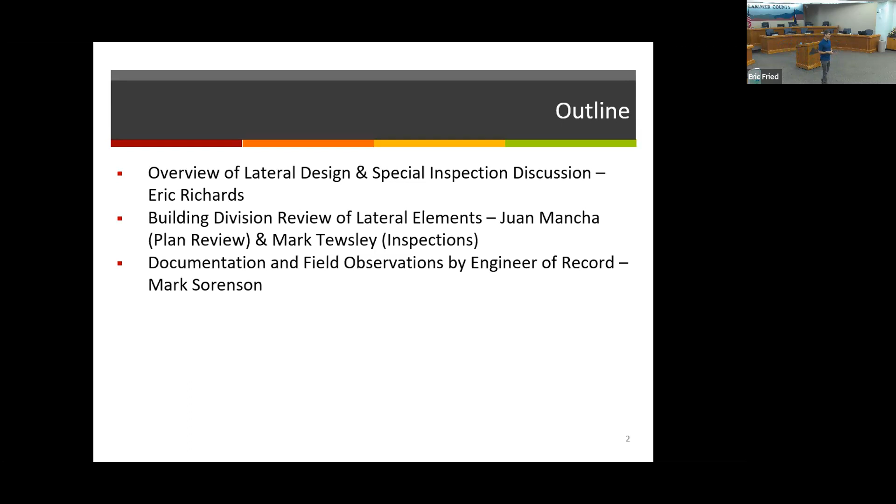Then again, Mr. Mancha and Mr. Tewsley will be talking about the building department's role in it, some of the plan review stuff that they go through, as well as field inspection stuff that the building department looks at. And then to end us up here today will be Mark talking about, again, the engineer's role in the field and some of the steps that we can take in the field during observations.

Some of our objectives, again, are to talk about and look at the complexities of lateral design, what goes into putting that design together, particularly related to our region here with the higher wind speeds and wind loads that we have. And also to discuss the importance of structural observations and structural inspections and the role that those play. And to provide an overview of the building department and the steps that they look at for some of their plan review, as well as their field inspections.

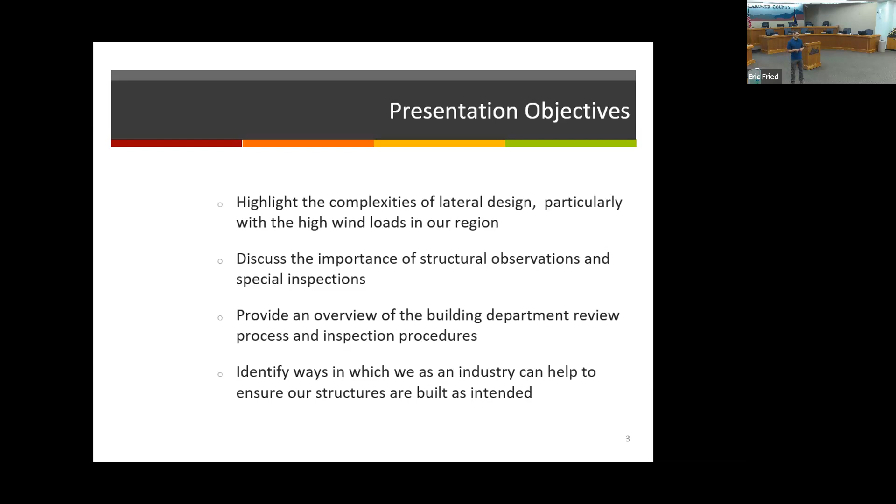And then identify ways that our industry can work to improve the whole process, working together and making sure that what we design is getting built, and built correctly.

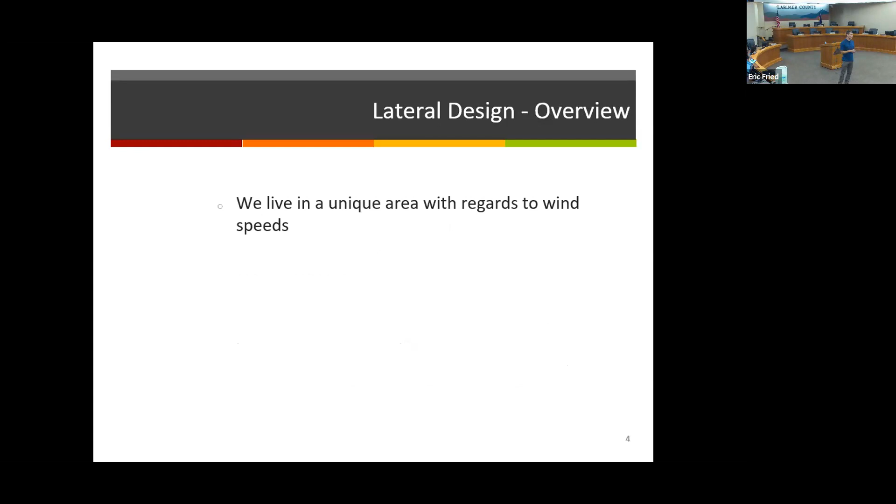So for a start in the lateral design overview, we live in a unique region here, not just because of the beauty of our mountains and people wanting to live here, but we also have our special wind region here with high wind speeds along the Front Range. Because of these wind speeds, we've got higher wind loads, making our lateral design more unique and challenging.

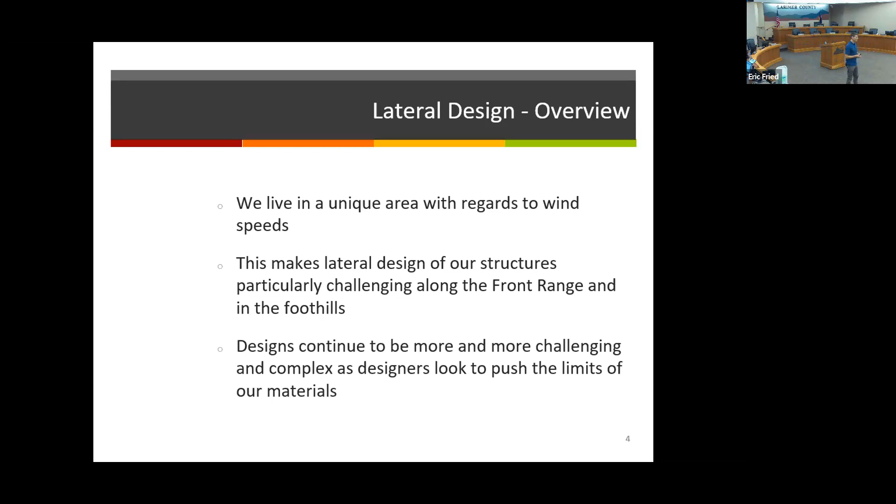And as I'm sure a lot of you know and see, our designs are becoming more and more elaborate, kind of pushing the envelope. Owners are wanting to see more glass, more windows, larger openings, garage doors in living spaces that 20 years ago we would have never thought about.

Here's an elevation view of this particular building. As you can see there, we've got large opening after large opening after large opening all the way across this wall elevation, therefore making a lateral design particularly challenging in this direction.

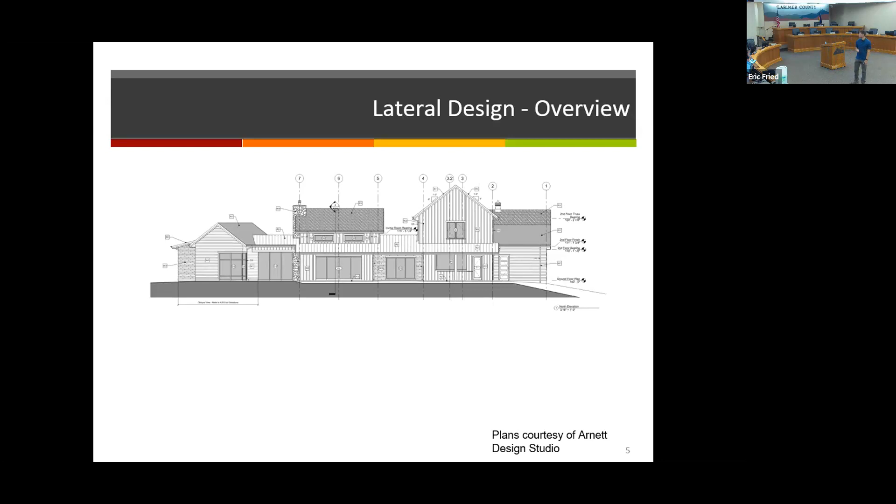And here's kind of that same floor plan. It's a little hard to see maybe from where you're at, but we've got large opening, large opening, large opening, storefront windows, another large opening. So lots of glass. From a lateral design perspective, that makes it kind of challenging to determine what's going to resist our loads in this building.

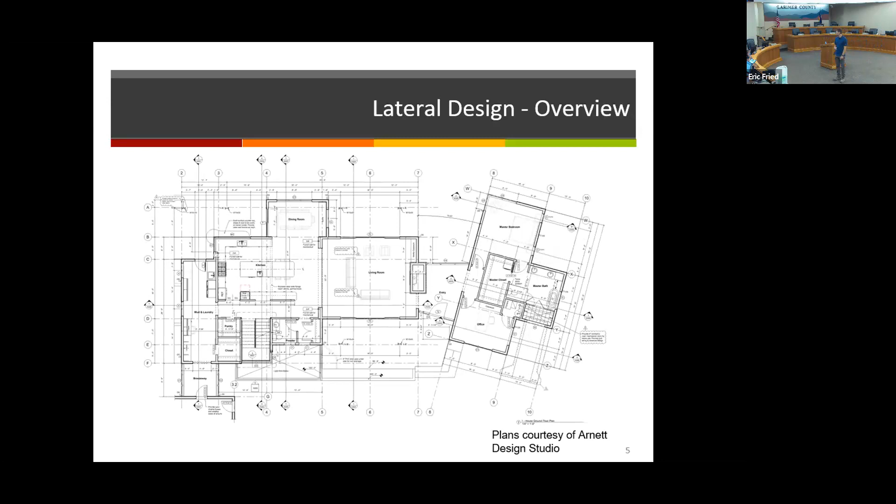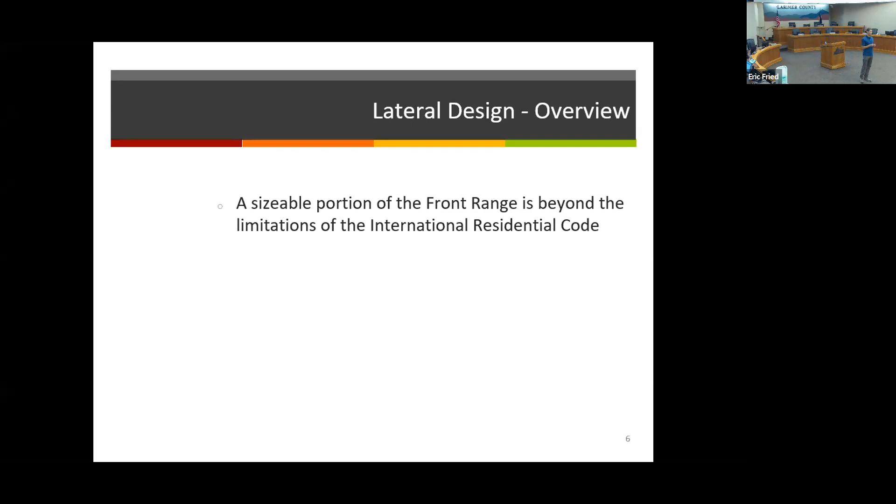So from a residential perspective, and in the commercial realm as well, a sizable portion of the Front Range falls outside of the scope of the IRC from a prescriptive wind design. Within the IRC, it says the prescriptive design is no longer valid for areas of 140 miles per hour and greater in wind speed. So once we reach those areas, we've got to look at other alternatives for our lateral design.

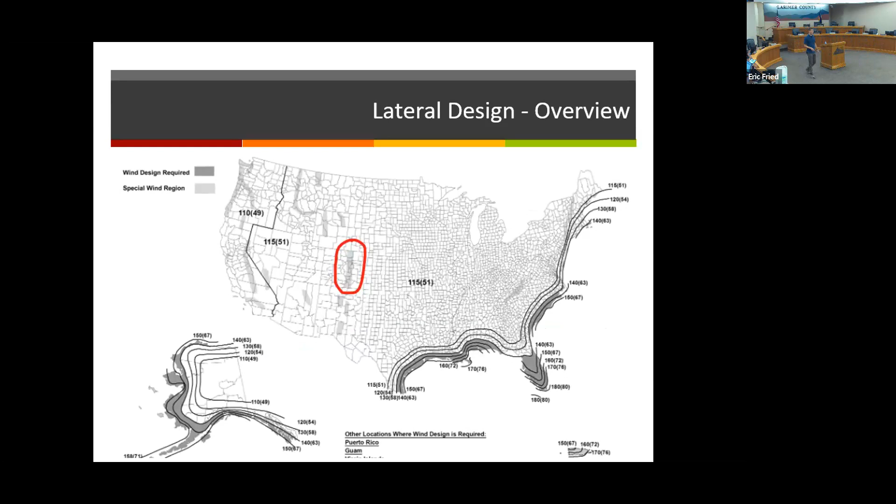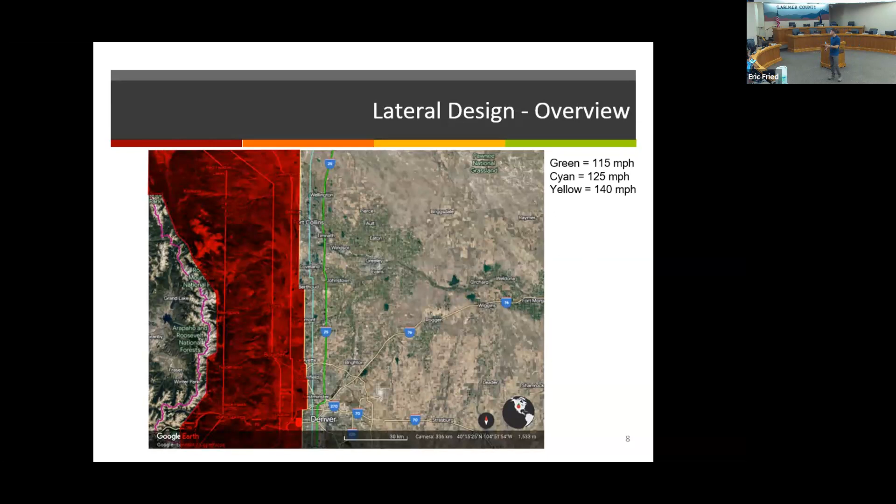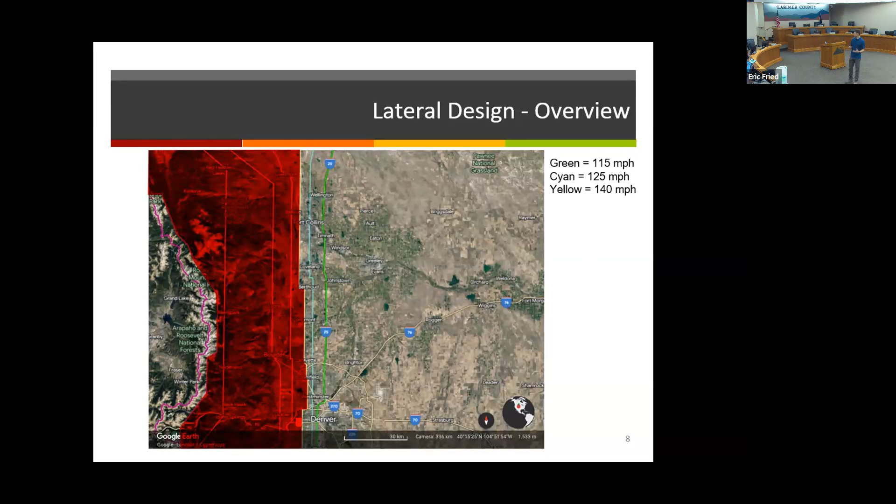The cyan line there moves up to our 125 mile per hour contour. And then the next yellow line, that's our 140 mile per hour contour. And that entire region shaded in red there is 140 miles per hour and greater, and therefore falls outside of the IRC and the prescriptive design methods for the lateral design within the code.

So within the IRC, at and above that 140 mile per hour wind speed, it does provide some alternatives. Some of those being the American Wood Council Wood Frame Construction Manual and the ICC Standard for Residential Construction in High Wind Regions.

Now, I haven't used either of these documents personally. Have any of you utilized any of those as an option in your designs? Okay, then I guess I don't feel so bad that I haven't utilized them either.

Typically, certainly in the commercial realm of construction, or generally anytime I'm designing a residence, I'm using ASCE 7 for loading, as well as the IBC, and the NDS, the wood design manual. Another alternative is the AISI standard for cold-formed steel framing. However, I have not seen any single family residences built out of metal studs in our area here. Just not commonly done from what I've witnessed.

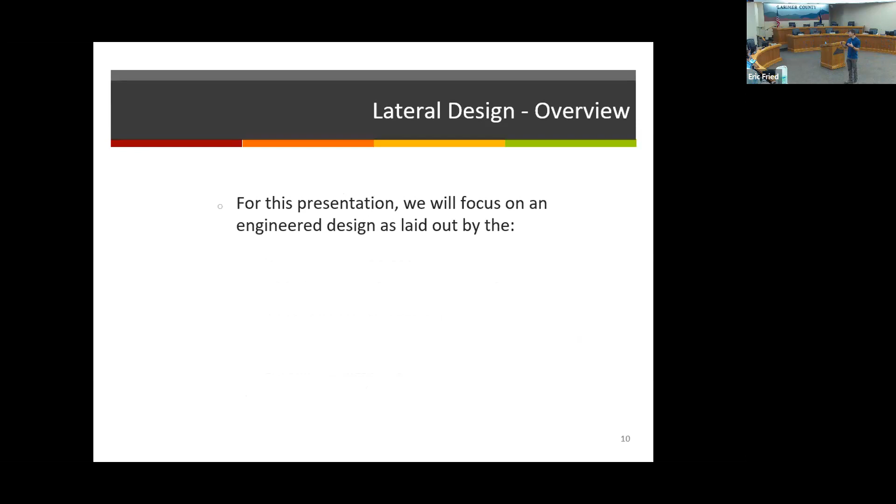So for this presentation, I'll just focus on an engineered design, since a large majority of our Front Range falls outside of the prescriptive design methods in the IRC, and this would be applicable to any commercial job you're doing as well. Again, utilizing the IBC and the American Wood Council, we call it the SDPWS, the Special Design Provisions for Wind and Seismic, the two codes to guide us through that.

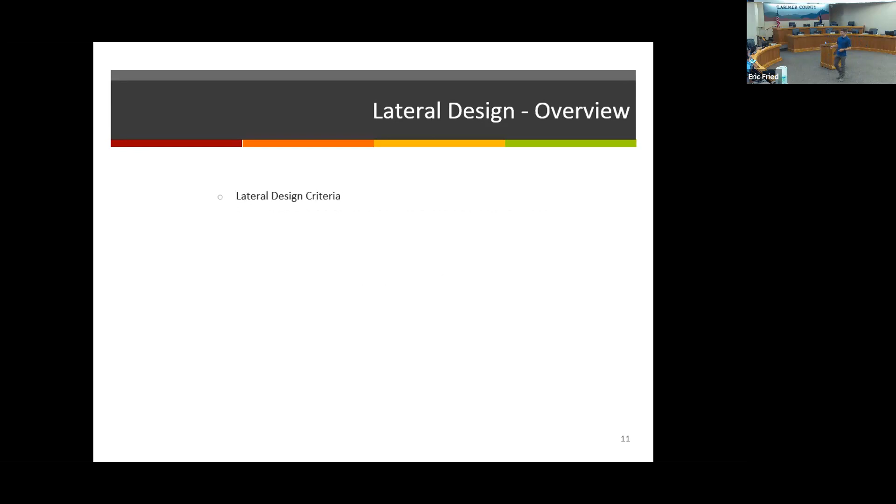So as engineers, as we're beginning our lateral design process, we need to determine our design criteria from a lateral standpoint. We're going to look at wind loading utilizing the ASCE 7 code. And again, SEAC has developed a Front Range gust map so that you can look at your particular job site and find what wind load to use for your project. Larimer County also has a really great tool, and I think Boulder County might have something similar. Larimer County has their wind and snow load map.

You can click on your parcel where you're designing. They've got your snow load and wind design speed for that property. And again, I think, does Boulder County have something similar?

I'm just curious, is everyone aware that through SEAC, there's the KMZ file that you can put on Google Earth, and then you can find your wind speed very easily just by looking it up with Google Earth? Is everyone familiar with that? Okay, that's a great tool. Yeah, if you're not, Greg, maybe we can try and work to send that out.

As Mark noted, that KMZ file is free to download. It's on the SEAC website. It's pretty easy to utilize. I've done it myself for that image that I had up there. Go to Google Earth. Got to play with it a little bit, but it allows you to import. You download that file to your computer. You can import it and then drop that in there and click on the wind contours.

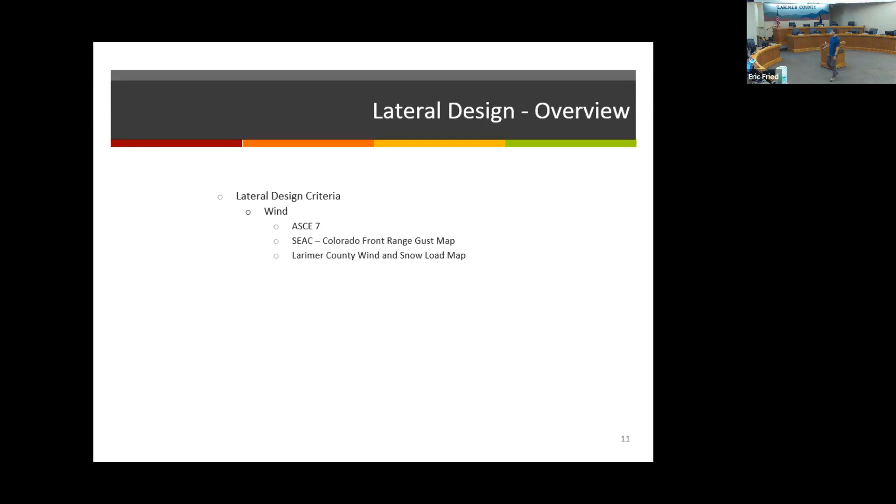So then continuing with the lateral perspective, if we're looking at seismic loads, not a huge concern here, and something that I'm not going to focus on a lot, but for this presentation, thinking more about our high wind load area. Seismic, again, ASCE 7 and two other tools that I've utilized. Structural Engineers Association of California has an online map that similarly, type in address or coordinates. It'll give you seismic design criteria.

I utilize that one. The Applied Technology Council, or ATC, has a hazards by location tool that you can use to type in your address. Similarly, it gives you your seismic design criteria. Other less common lateral loads that you might encounter could be flood loads, soil loads, or high in the mountains, maybe designing for snow or avalanche loads too. Again, less common, but specialized regions might have an engineer look at that.

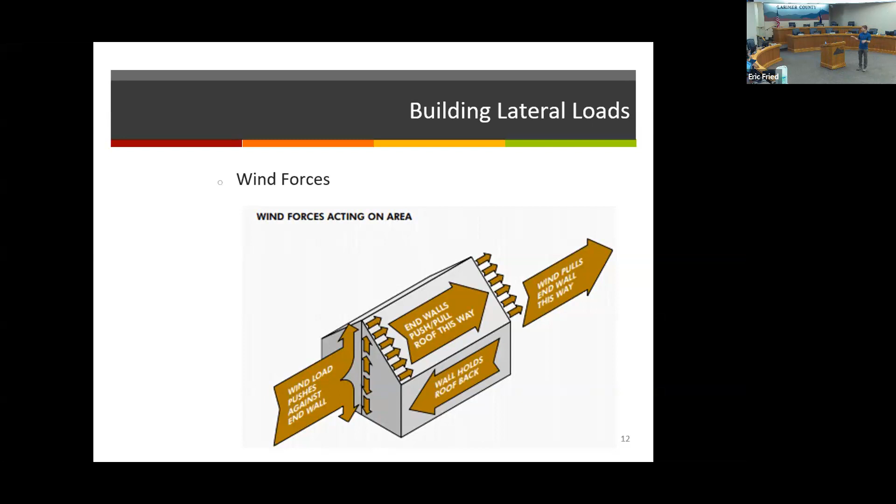So broadly speaking, in a building, wind loads are applied. As wind loads are applied, as you can see, hitting our walls, part of that force is going to go downward into the foundation. The other parts are transmitted up into floors and roofs, trying to push the building over, and then our lateral system is holding that back, whether that's with exterior walls or interior elements.

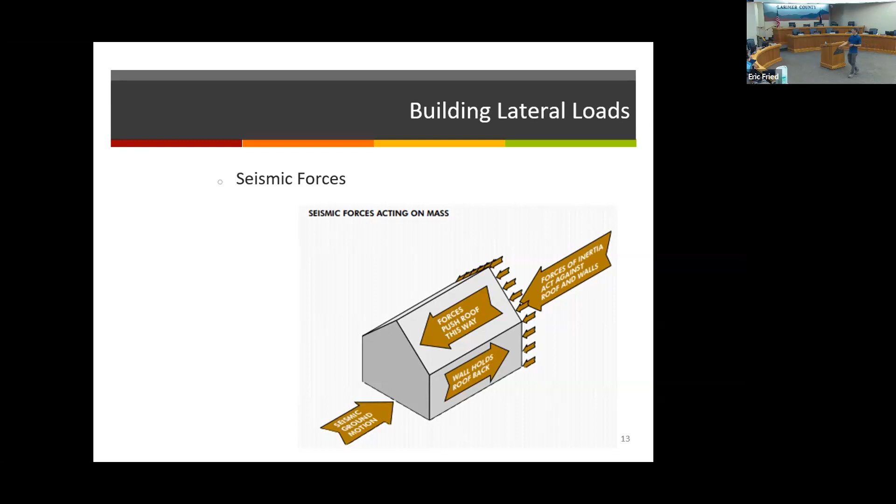Similarly, with seismic, ground motion is initiated, and then we have inertial forces wanting to push the building over at our roof and floor levels, and then our lateral elements, the walls and interior elements, are holding that back. Regardless of the type of loading, our end goal is to collect those forces or determine how they're applied to the building, collect those, distribute them to our lateral resisting elements, and then transmit that down into our foundations.

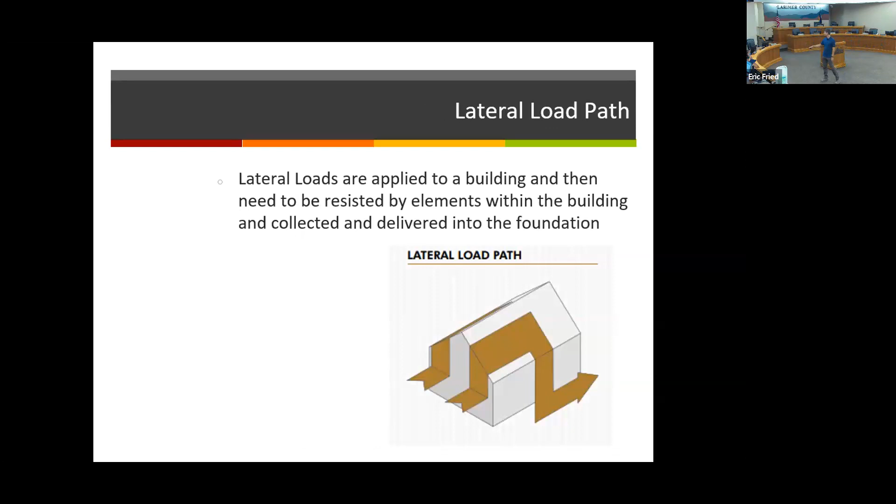Some elements that could be used for this are going to be steel braces, concrete or masonry shear walls, concrete or steel moment frames. I know talking with Mark Tusley here, the more elaborate designs we're getting, large openings and stuff, we're starting to see a lot more steel being put in residential construction as well as our commercial projects. Other options are cold-formed steel framed walls, again more on the commercial side, or wood frame shear walls could be used in what we're focusing on here today.

So as an engineer or a designer is looking at their building, trying to determine how to resist those forces, you're looking at the geometry, how loads are acting, where they're transmitted, and how we're going to resist those forces, generally distributing those to our walls and floors, and then looking specifically with wood construction, what walls are available, where can we resist those forces, and are they adequate, do they meet aspect ratios and such.

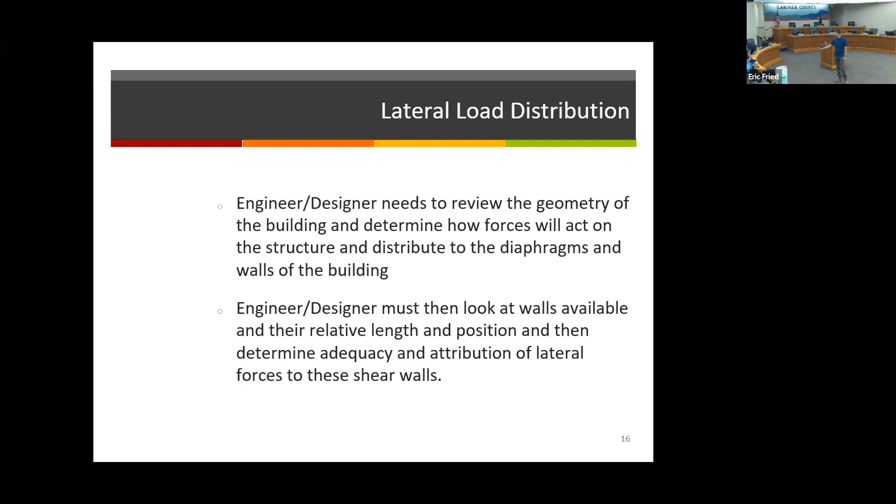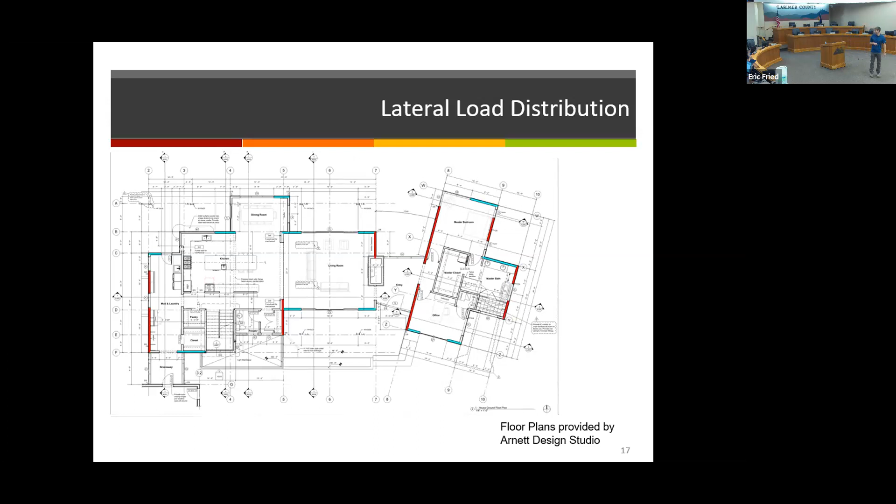And here's that 3D schematic again of that house. Again, we've got kind of large 2-story elements there, catching a lot of wind load. We've got clerestory roofs here. So, it's a lot of work to transmit and kind of cover where those forces are going within the building.

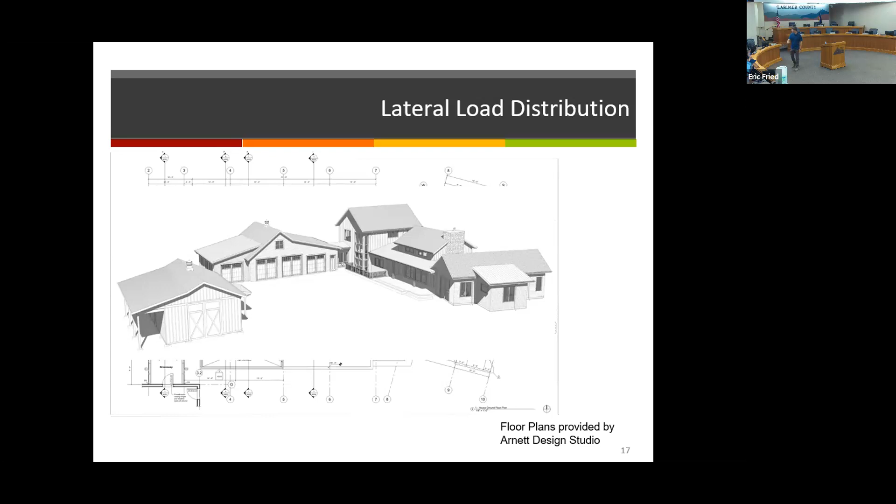So that kind of leads us then, once we've looked at a building, we're starting to determine what forces we have on it and how we're going to resist those. Then the designer is going to dive into the SDPWS, or the Special Design Provisions for Wind and Seismic. And the elements we're looking at, we call them our diaphragms. That's going to be our roof, our floors, and sometimes, or less common, ceilings could be utilized as a diaphragm as well.

And then we'll also be looking at designing our shear walls, or walls either from a gravity standpoint, or maybe they're functioning as lateral elements. Hopefully they're working as both. That's going to help us with overturning forces on those walls.

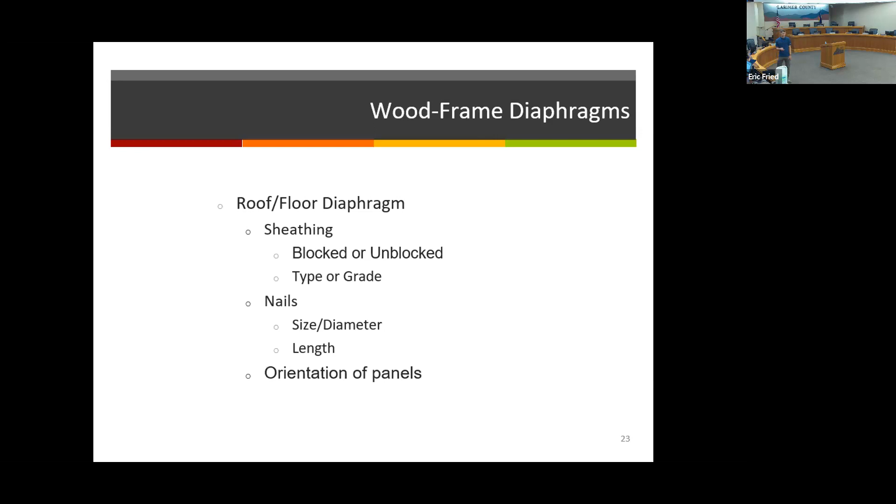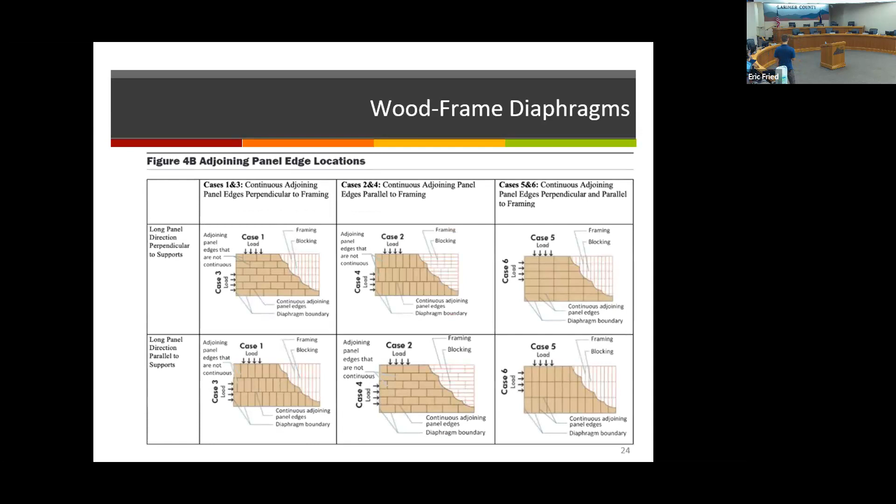Now the SDPWS has a graphic such as this showing different configurations of how floor diaphragms or roof diaphragms could be installed. As you can see, we've got load cases noted on there, 1 through 6, and then different lateral capacities associated with those. I would caution you to be aware, again, how those are oriented relates to different load capacities.

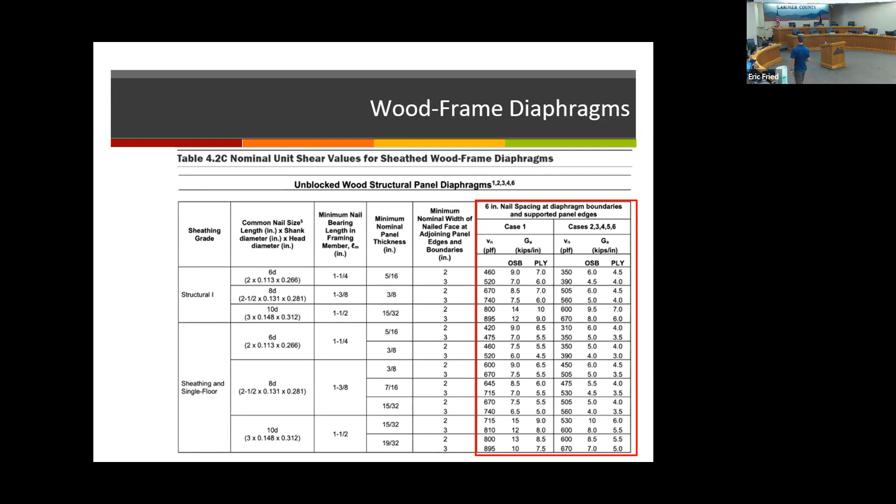And I would say, unless an engineer is going to be very explicit or very detailed in their design, I've always typically utilized the lower value or more conservative values there, but it's there as an option. So for inspectors and building officials, just be aware that that could be something that a designer has selected and needs to use.

So orientation of our panels, and boy, there we go. Sorry about that.

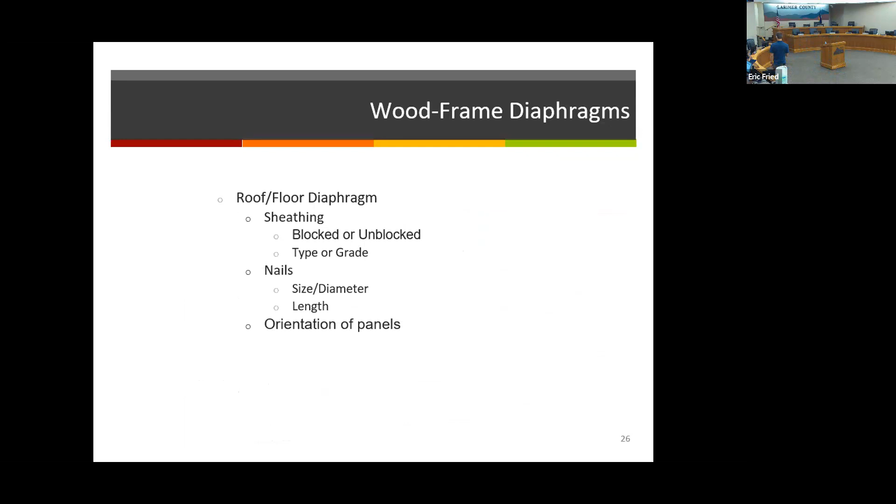Perhaps those values don't work. We've got some other tools at our disposal, some high load diaphragm selection tables. And one thing to be conscious of when designing these is that special inspections are required per the code for high load diaphragms. And with that, we've got different nail pattern options that we could select to get to those higher values.

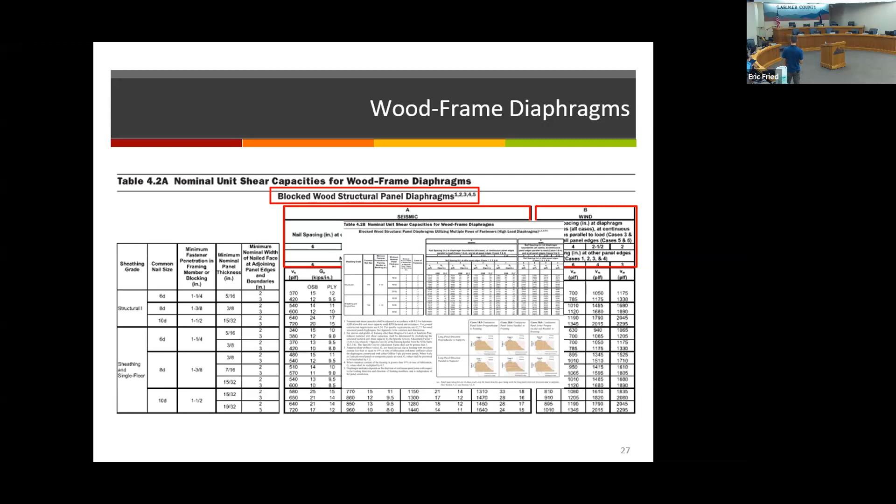With that comes along some specialized details that are required per the SDPWS code. These are shown in there. So again, for building officials, inspectors, designers need to be aware that if that high load diaphragm is utilized, these are special details that need to be paid attention to.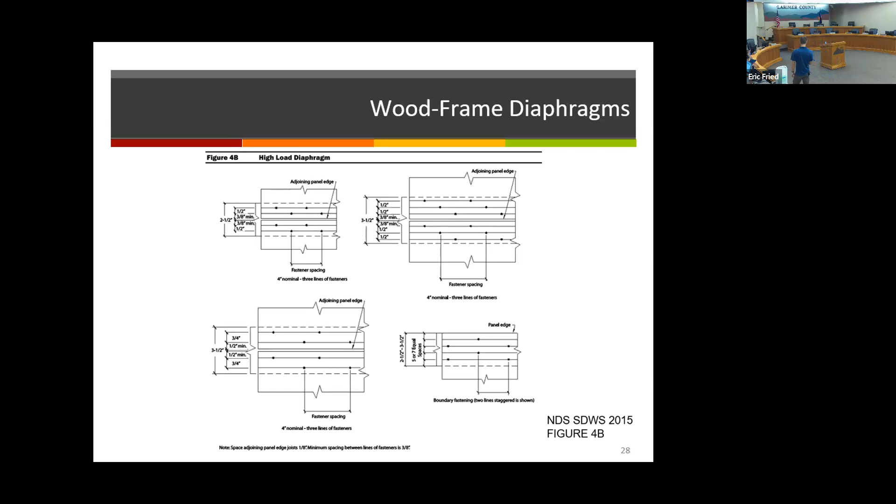Some other elements of the roof floor diaphragm that we'll be looking at would be framing size and spacing. If you've got areas where you're exceeding kind of 24, 32 inches on center, that starts to impact, again, those design values. And then we've got to look at the connection now, how we're transmitting those forces out of that diaphragm into our lateral elements or shear walls.

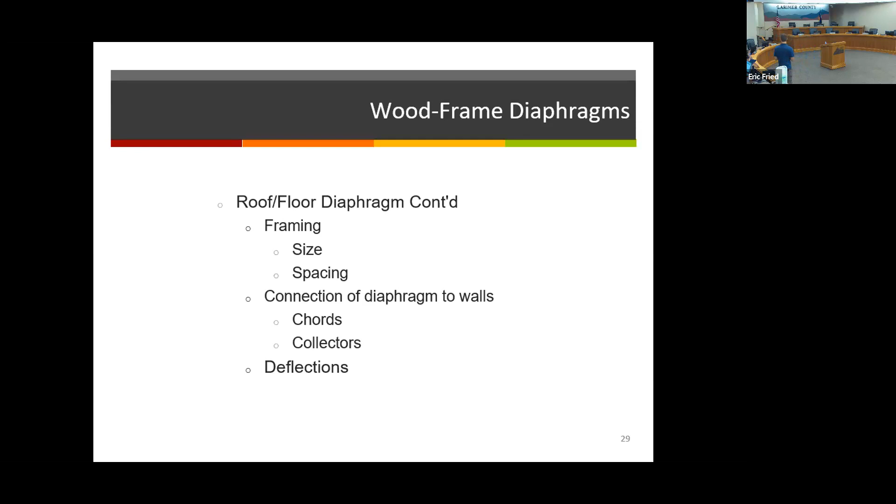And the other pieces of a diaphragm are going to be the chords, which are resisting bending forces in the diaphragm, and then the collectors that I'd highlighted before. All elements that need to be thought through, addressed, and designed. And lastly, looking at deflections within that diaphragm, making sure they're staying within the code prescribed limits for those elements.

Now, through the horizontal members, now we're looking at our vertical shear wall elements. And with that, we've got several shear wall types at our disposal. Those are going to be segmented, perforated, or force transfer around openings. And I would say the general selection process is going to be in that order. A designer is probably going to start with a segmented option. If that's not working based on the amount of force or length provided, maybe we're going to go to a perforated shear wall. And lastly, a force transfer around openings methodology.

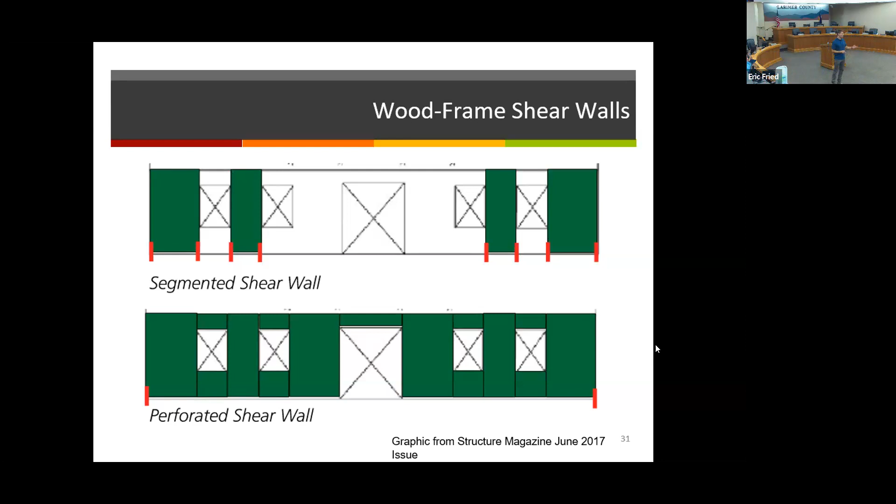Yeah, there are tools out there. I have seen APA kind of advertise that. I've never dove into that and tried it myself, but it's pretty handy. Okay, maybe check it out sometime.

So thinking about our different methodologies with our shear walls, similar to the diaphragms, we need to be thinking about our sheathing type here. We've got more options within shear walls, because now we have not only the wood structural panels, but we've got gypsum or Portland cement plaster, lumber sheathed shear walls. Again, what I've seen mostly in our area is the wood structural panels for the outside; sometimes we can get into gypsum shear walls on the interior of a building. And then again, similarly, selecting our thickness of our sheathing.

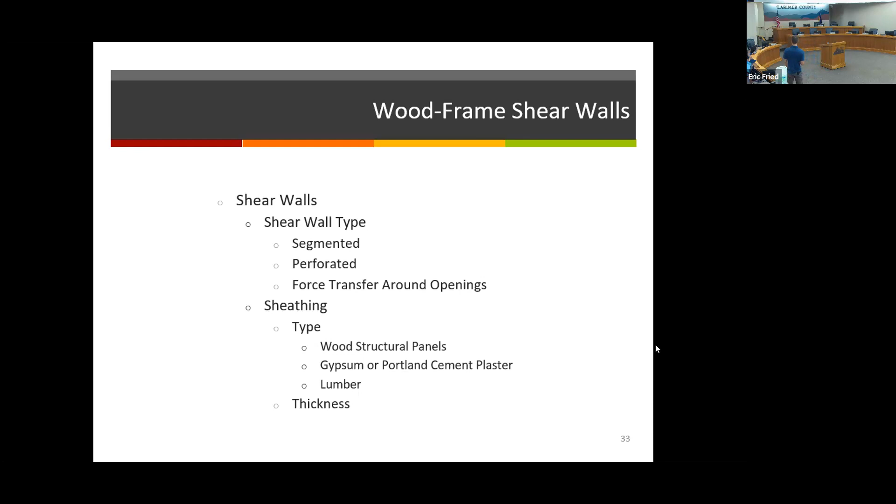All right, and then similarly, our nail again, 6, 8, 10d. I think, Mark, you were talking about, or the other Mark here, the new advent of the ZIP sheathing or the R-sheathing out there. We've got insulation that contractors are trying to drive nails through. So something to be considerate of is our nail size and spacing, and being very explicit with what we need and what system is used there.

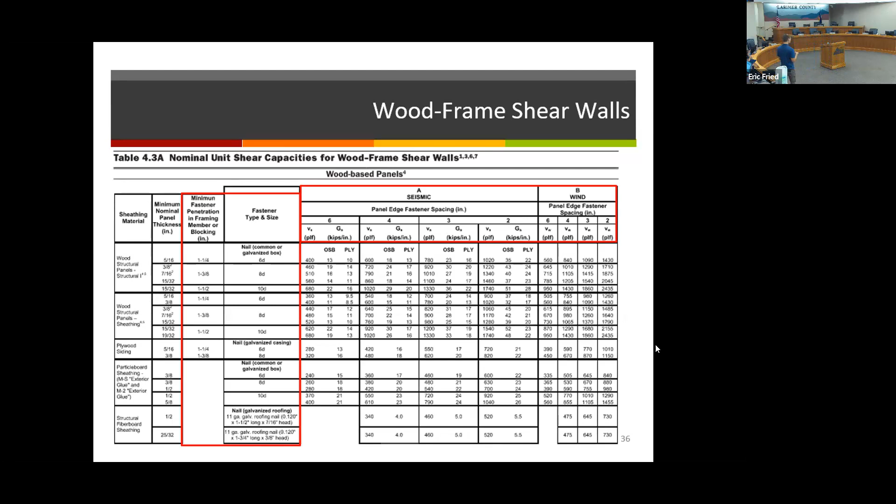And then again, here we've got different options for nail spacing, translating into different shear capacities or values for our shear walls. It used to be when designing, you could have within the same table blocked or unblocked values. The SDPWS has now gone away from that. Blocked shear walls are the standard. And if you want to use an unblocked value, which has lower capacities, you can do that, but you just have to take a reduction for that.

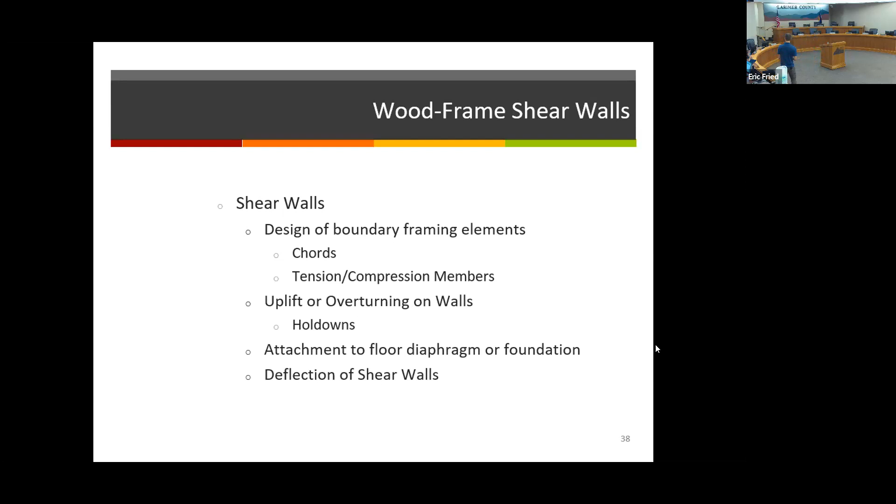Kind of the same thing for the shear walls here. We've got our chords, top and bottom plates, our tension and compression members, side elements that resist those forces. Looking at lateral overturning of shear wall panels, especially in the segmented design, where we have to design our hold-downs for those. And again, our attachment at the top of the wall from the roof or floor diaphragm, and then down at the base into our foundations or floor below. And then lastly, we need to be considering deflections. So there's a lot of steps and things to look at in the design of that.

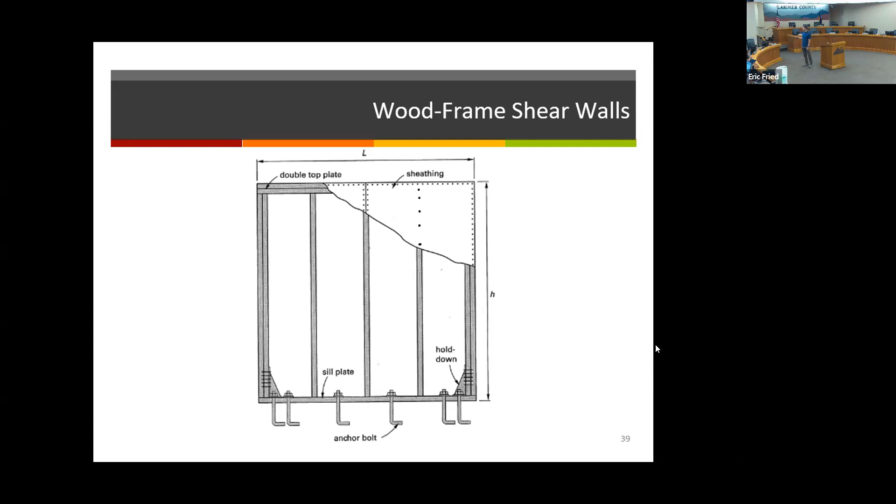Here's a graphic of a standard shear wall construction. Again, we've got our top and bottom plates there. We've got side members for tension and compression, our sheathing on the outside face. We've got hold-downs on the ends there, and then anchor bolts in the sill. So there's just a lot of parts and pieces of that.

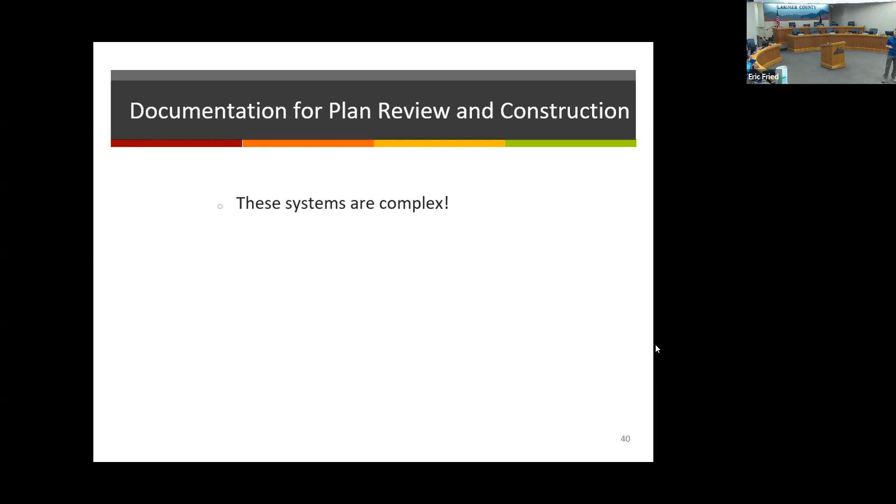So that goes through a real quick, broad overview of the steps for a lateral design, thinking about a building system and getting all those forces transmitted from the roof through the walls, maybe multiple floors down to the foundation. These systems are complex. There's a lot to them. So for us as designers, I think it's important that we remember that those folks who are out there trying to construct these and inspect them are generally not structural engineers. So we need to work really hard to be explicit in our details and the design, and clear and concise with that.

Ways that we can help ensure that we're doing the best job that we can are through clear and concise documentation. I know Mark's got some details he'll show in his portion of the presentation later to work on that. But another tool that we have to help ensure that things are getting built as designed are our inspection and observation processes.

Now, structural observations, as defined by the IBC, is when a registered design professional is out there looking at our structural systems for general conformance. And then likewise, special inspections are code mandated to look at particular elements and aspects of the building, whether it's continuous or periodic, looking at very specific elements by trained individuals. For example, the wood diaphragms and shear walls that I've discussed here.

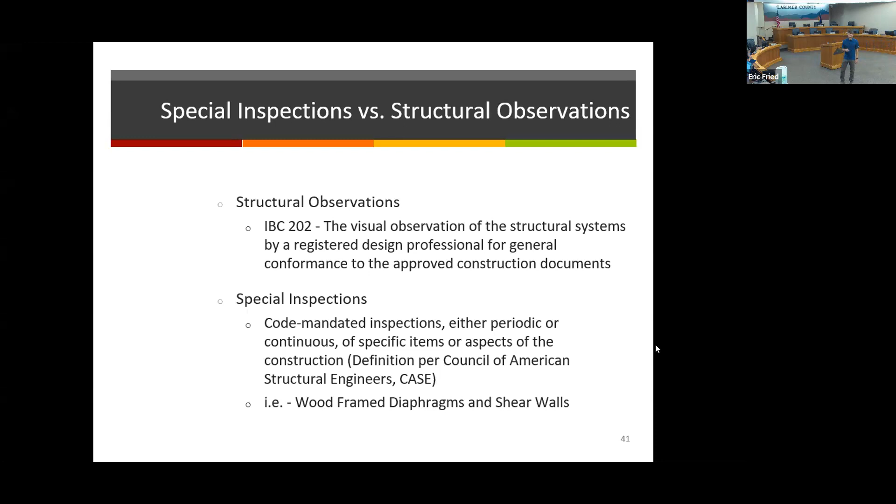So, in my opinion, structural observations and special inspections are not one and the same. They're not equal. Structural observations, generally, if I'm out there performing, is a bit more higher level. I'm not looking to quite the detail that I would expect a special inspector to be doing. I can look at sheathing thickness. Are the shear walls installed at the locations I have? Are those hold downs there? There could be a lot more depth, but generally an observation is higher level and not the nitty gritty that a special inspector would be looking at.

First off, your liability insurance for most of the engineers here will never cover the word inspection. You're correct. I do a lot of testifying in a court of law. There's one engineer in particular that was working in Denver. He got on the witness stand and literally got ripped by the attorney. And he's out of practice. He quit. Observation is what you do, okay? Special inspection is an open book for every attorney in this state and country to rip you apart, because you don't do a special inspection.

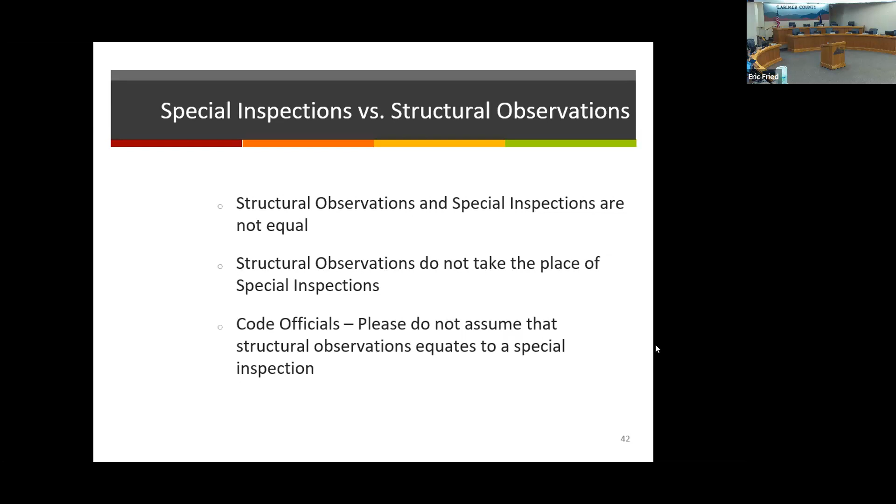That's 100% true. As structural engineers, we do structural observations. Correct. It does not replace a special inspection. It is in addition to a special inspection, if special inspection is required. But many of your code officials or building plan officials right now require that you specify the special inspections on your plans. So our drawings indicate what special inspections are required, not that we're doing them as the engineer of record. That's still bad news. Another building official required that too; I told him I don't do special inspections, and he wasn't going to issue a permit.

And as I did in Jefferson County, the foundation compliance form letter, if you read the last sentence, I got that put on the form. Before that, it was a warranty and a guarantee of the performance of that foundation. Now it has a disclaimer sentence at the bottom. The same goes with having to have special inspections. There's a state provision in professional engineer licensing that you can't tell me how to run my job. So be careful of the word. I do not use the word special inspection or inspection. When I go on site, we do an observation report. Correct. We do not write an inspection letter ever. Engineers, all of us in the room, we don't do inspections. We do structural observations.

And I used to design hotels and motels around the whole country. You've never gone through an inspection until you've been to California. Yeah, that's true. They have a tape with holes in it spaced at 6 inches on center. They will literally pull the tape down along the sheathing and nailing. Where you're missing a nail, where the head of the nail is not in that circle, they put a little red dot. And if you exceed 40% or 30%, depending on the jurisdiction, they make you re-nail the whole entire thing. We'll get to that later, because I'm going to talk about structural observations.

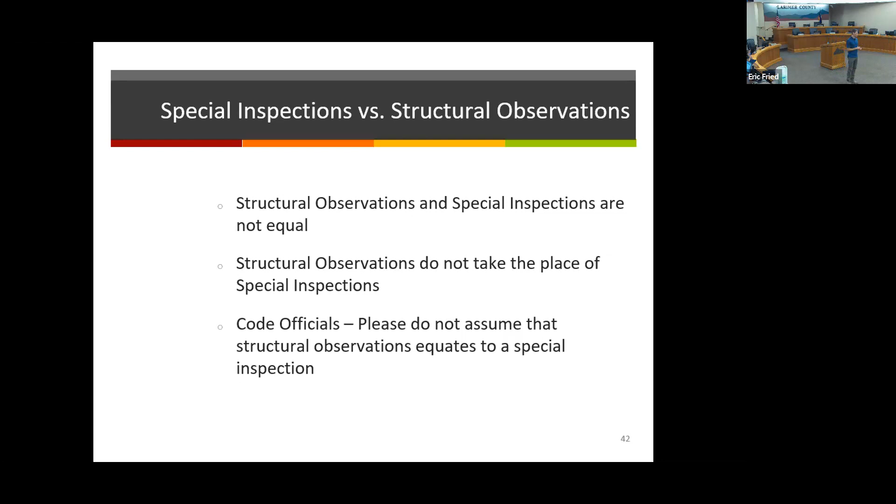And again, to my last comment up here, don't assume, because structural observations are, in our world, in our mind, different from inspections. They are not one and the same. Now, are we as registered design professionals allowed to operate as special inspector? The code does permit this, provided we are qualified, quote unquote. What constitutes qualified? I don't know, to your point there, that's a good question. Are there certifications, education and stuff?

I would say if I had to, I could operate as a special inspector for foundation elements. I could look at rebar. I could look at the size and spacing and clearances. I'm not qualified to look at welds, high strength bolting. I don't have that certification background or anything. I could not operate at that.

Here in our wood framed that we're talking about, could I be an inspector? I probably have those qualifications. I could look at nail sizes. I could look at penetrations. We could look at sheathing sizes, but there's a lot of parts and pieces there that if I were to operate as an inspector, I'd have to have a lot of checklists and processes in place.

And to Juan and Eric's point, and maybe other jurisdictions, the thought and intent was to make sure that our code officials aren't expecting us as engineers to be performing observations and inspections, because in our minds, we're always doing observations, and those are not equal. So are there liability issues or restrictions on insurance policies to do that?

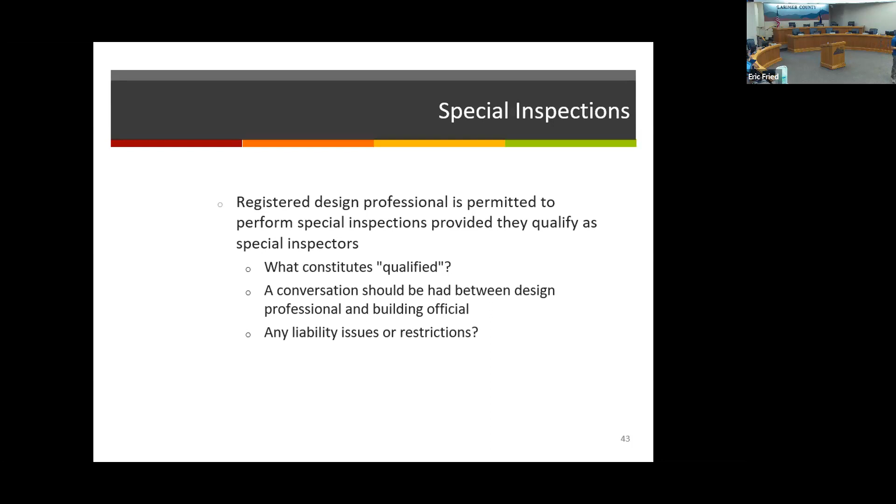But he did caution that if you are going to act in that way, you work really hard to put the proper processes in place, that you've got checklists and procedures written up so that you and your staff are looking at every single thing. So I'm not advocating that we try to operate as a special inspector, but it's permissible by the code, and there may be certain instances where you are the most qualified individual to do that. So if you're going to operate in that manner, I just caution you to make sure you've got the right processes in place.

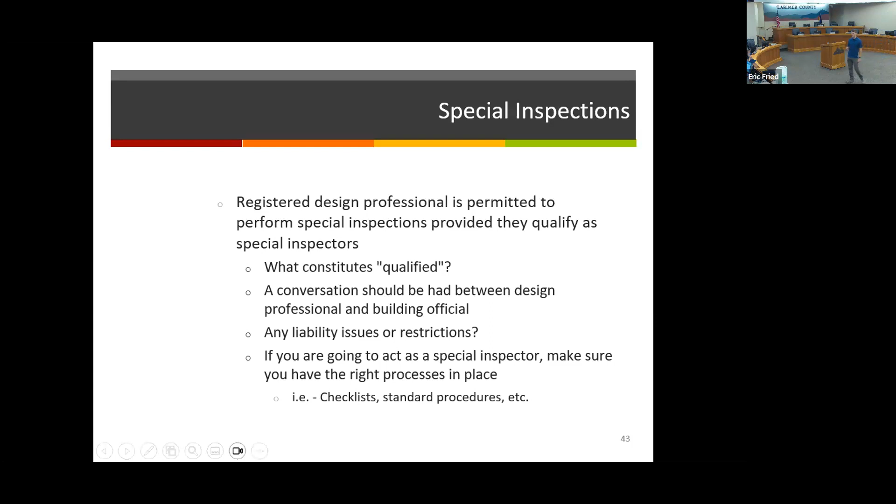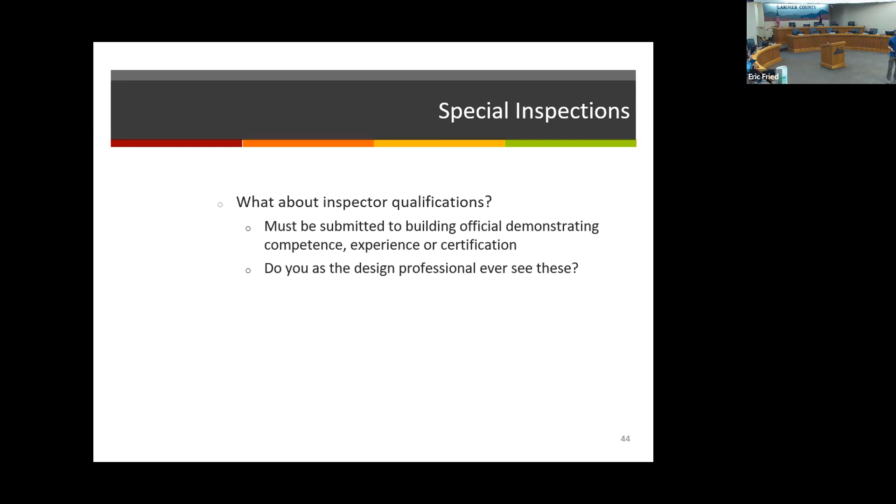Inspector qualifications. Now, the code requires, whether we're looking at third parties, that these qualifications be submitted to our building officials so that they can review those and verify that they meet a minimum level of standard. Do you as the design professional ever see these? I personally have not. I've not specified those and not reviewed those. And just to pose a rhetorical question to the group, is that something that we should consider or get into? I don't know that I want to dive into that, but is that something that we need to think about as a group and look at, maybe something for us to consider.

So when are special inspections required? Again, speaking of our wind region here, per IBC 1705.11, in wind exposure category B with wind speed at 150 miles per hour or greater, special inspections are required. City of Boulder falls within that, correct? Yeah. Likewise, exposure category C and wind ultimate at 140 miles per hour or greater. Again, a special inspection is required for those structures.

Now, IBC does have some exemptions. Light frame wood structures designed per the IBC. A lot of these are extraneous structures, small additions that don't cause life safety concerns, or when permitted per the IRC, which I found interesting because the IRC prescriptive method doesn't work above 140 miles per hour. So you have to use those other two documents if you were going to design for that.

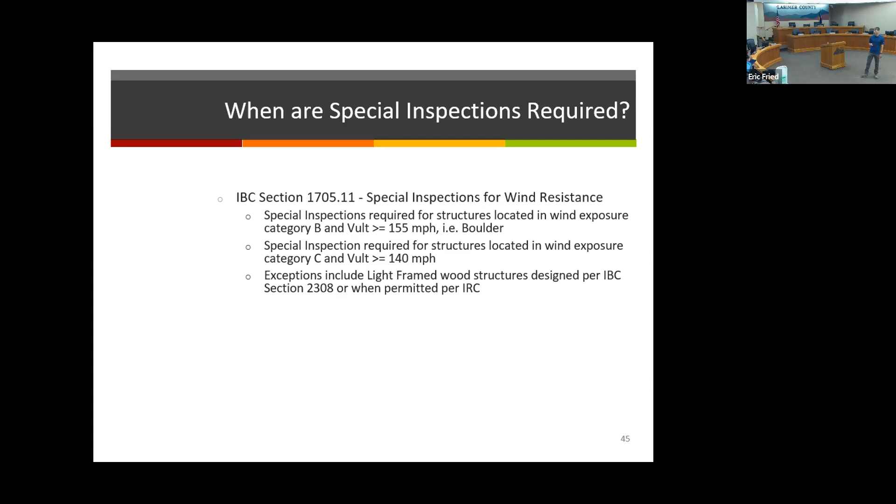Okay. And then section 1705.11.1 for structural wood, periodic and special inspection is required for our lateral force resisting elements: shear walls, diaphragms, hold downs, drag struts, things of that nature. Now the code does provide an exception: if we're outside of the 140 miles per hour, and you can have shear wall and diaphragm nail spacing at 6 inches on center at edges and 12 inches in the field, special inspection would not be required.

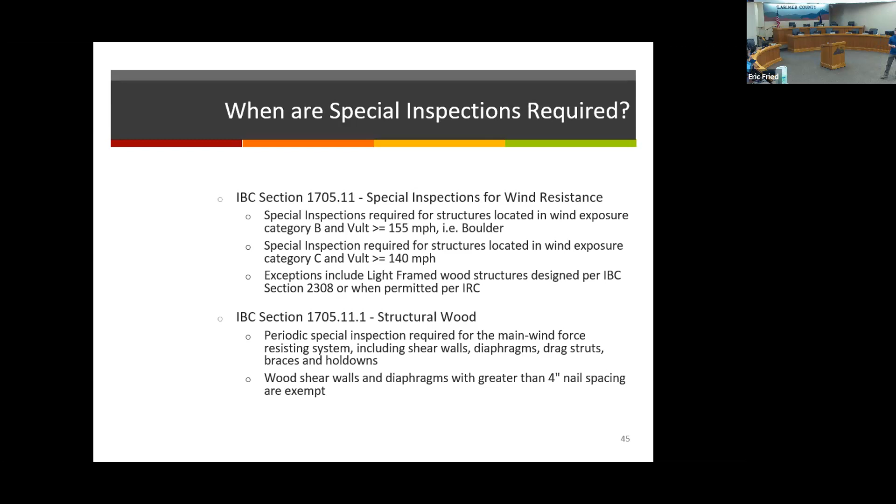Next. All right. So that got me thinking, as I drive east of Fort Collins, anywhere east of I-25, the Greeley area, Windsor, East Fort Collins, we've got tremendous amounts of multifamily residential construction going up. We've got 2, 3, 4-story buildings being constructed. And if you can design those from a lateral standpoint so your shear walls are at 6 and 12 for nail spacing, and we're outside of that 140 miles per hour, special inspection would not be required.

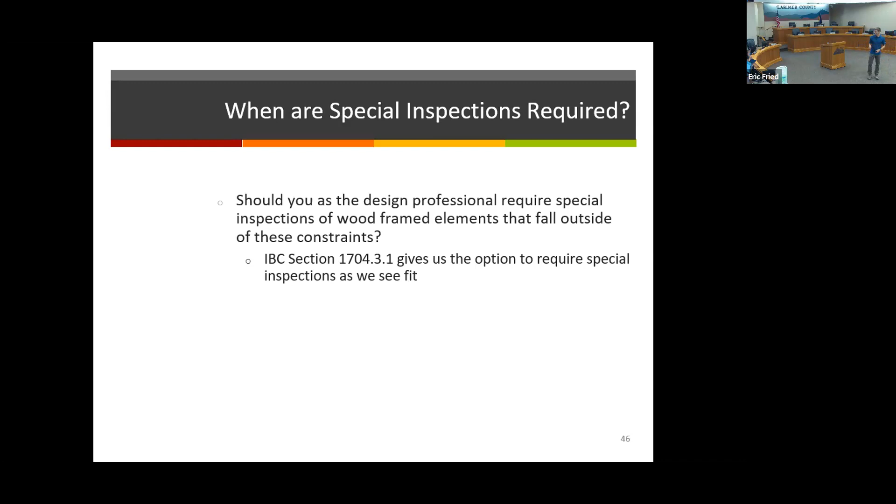Now, are we okay with that, or would we want those to have some higher level of inspection? The code does permit us as design professionals to require it as we see fit. Another driving factor for providing a presentation of this nature is that a lot of those multifamily projects have corridor walls and demising walls that are a good use of an interior gypsum shear wall. Now, the challenge with that, as well as potentially a double-sided shear wall, is the sequencing.

Walls go up, floors go up, roof, everything's covered. We get the exterior sheathing on, inspector comes out, looks at all that, everything's good. Contractor's moving forward. Well, I can't install those interior gypsum shear walls or sheathing till I get my electrical run through there. At that point, we as engineers are done coming to look at stuff, and unless we've really thought it through, we're not out there looking at gypsum shear walls. Or if you've got a high load element that is double-sided, that layer of gypsum or sheathing is coming on at a much later date when we're done and out of there.

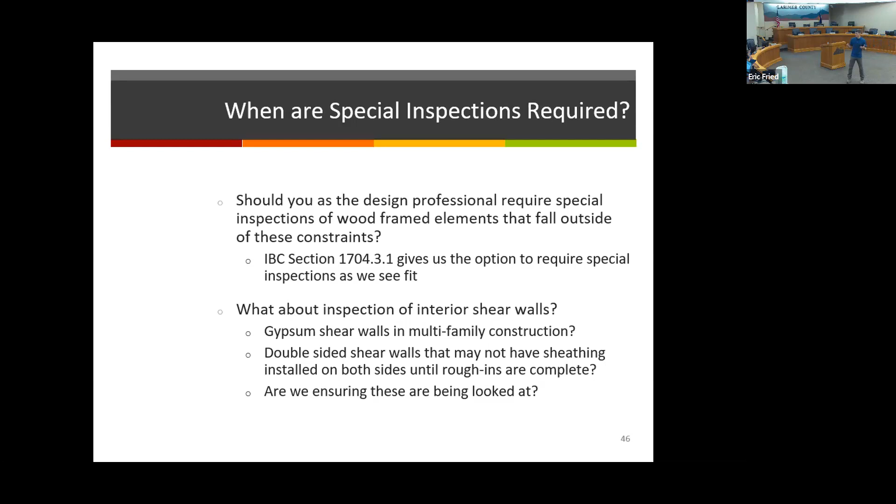So from an inspection standpoint, I want somebody out there verifying that nail or screw spacing is at the right pattern and spacing. So one way to address this was that we as design professionals can specify special inspections for that. I worked with Blake, and we developed a special inspection table specifically for this type of instance, not only to address exterior wall sheathing, but to ensure that a third party is coming out to look at those interior gypsum shear walls.

I know, in discussions with you, Mark, you kind of avoid gypsum shear walls. Is that correct? Or would you use those as part of your design process? I prefer not to, but designing in Boulder a lot with really high wind, I don't want to count on gyp. You're allowed to count on exterior plywood and gyp if it's wind, and sum them and take the sum of both. But I'd rather just count on the OSB and go to a tighter nail spacing if that's what I need. And in some cases, I have to do double-sided plywood.

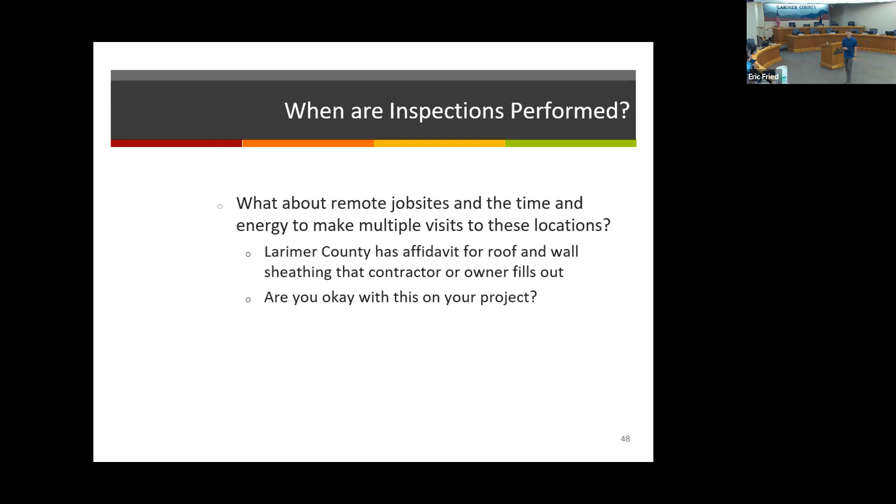And it sounds like you're kind of getting away from that, but I know that a tool you would use is an affidavit for the contractor to verify that they've installed sheathing and nailing per the specifications on an engineered plan. And I'll let you speak to that here a little bit, where you're at with that. But again, just things to be aware of, like, are we as designers okay with potentially a homeowner or a contractor just signing an affidavit that, yes, I put that sheathing on, it's the right thickness, the nails are at the right spacing, yada, yada, yada. Just things to be considerate of.

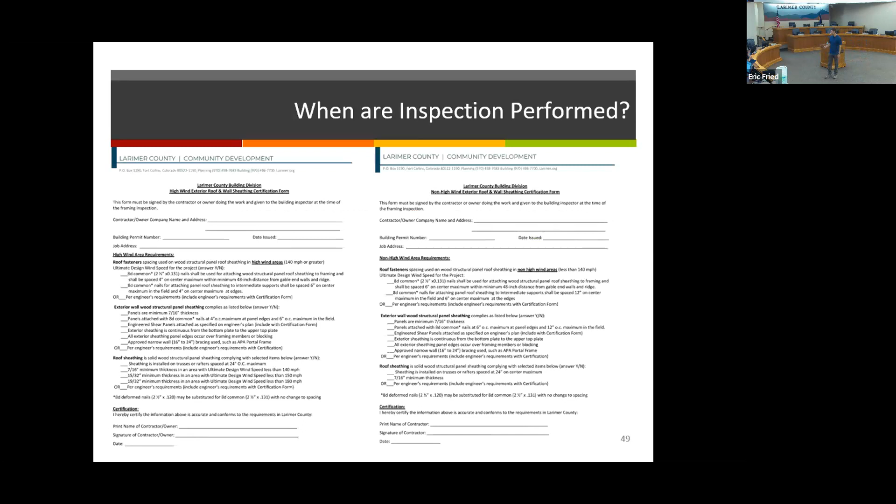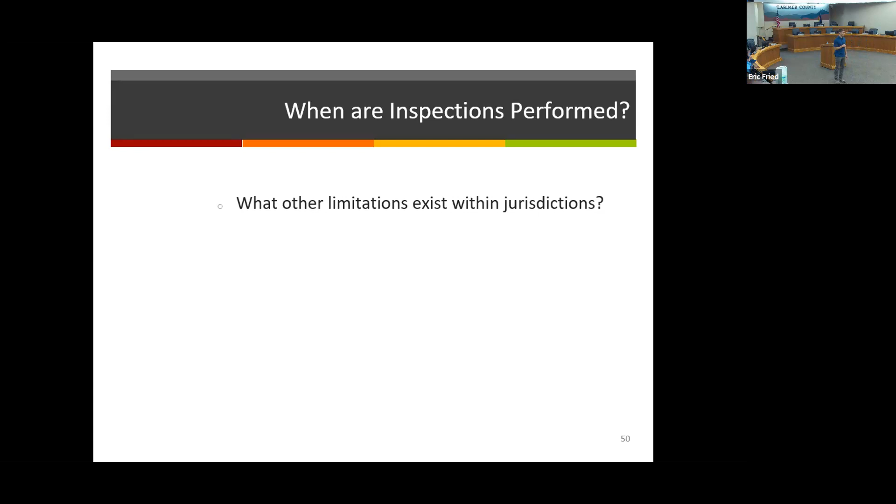Here's a look at those affidavits that the county has on their website. Again, I'll let Mark and Juan speak to those when they get to that. What about other limitations that exist within jurisdictions? Do we have anyone from the city of Fort Collins here? Yes, sir. So my understanding is, limitations that are anything over 2 stories, will the city inspect that or will they not? Not for shear. So up to 2 stories. Right, that's just a limitation that the city has. So things that we as designers need to be aware of and considerate of, and making sure that we've got those inspection tables in place so that someone is out there looking at those.

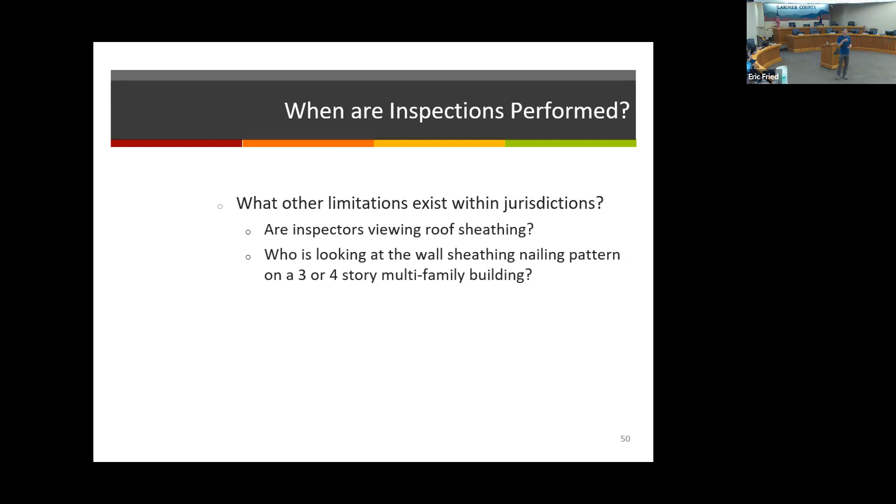And other elements, whether it's within a jurisdiction or a special inspector, certainly jurisdictions have risk management in place where they don't want their inspectors up there on a 6:12 roof climbing around and looking at that; they have to have fall protection, a lot of processes in place. So again, are we getting those looked at? And if not, are we okay with that? Our multifamily residential projects, 3-4 stories, if the city is not able to look at that, are we having special inspectors out there? Are they out there on a boom truck looking at nail spacing 3 or 4 stories up? I don't have an answer to that. I don't know if that's the case, but things I think we need to consider and maybe have a conversation about. And that's why I wanted to bring code officials and inspectors in here together to see where those limitations exist, and do we have gaps that are not being covered?

So with all that, I would like to encourage specifically our designers to get out there, perform those observations, and get your eyes on a project. And if we have particular elements or areas where it's a really complex design, maybe we need to look to specify special inspections, use that as a tool so that we have a third party out there, somebody else looking at it. If we can't get out there, most engineers, I think we've got a lot of 1, 2, 3 person shops that don't have the resources to be out there looking at multiple units and doing half a dozen to a dozen site visits to job sites all the time. So maybe think about using special inspection as a tool to help ensure that we're covering our bases there.

And hopefully contractors don't feel like we're looking over their shoulder. Hopefully they're willing and want to see us out there on the job site to help make sure that they've interpreted things correctly, that things were built properly, and that things are in alignment of what they should be.

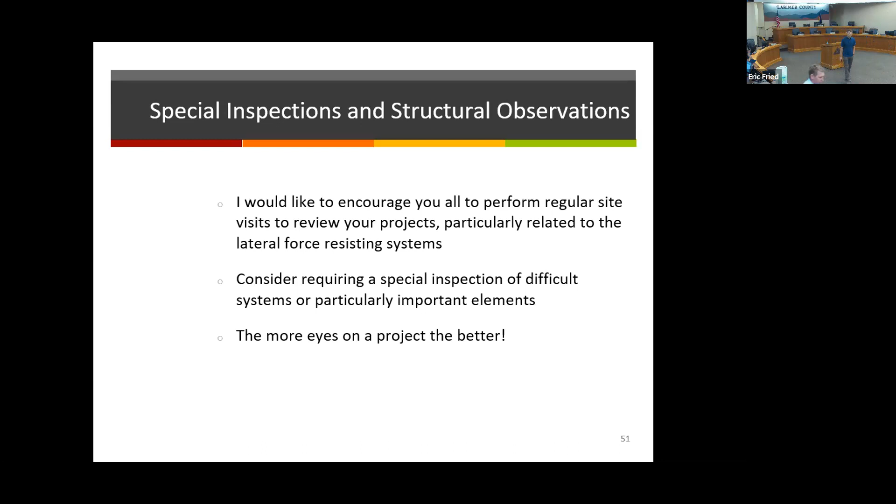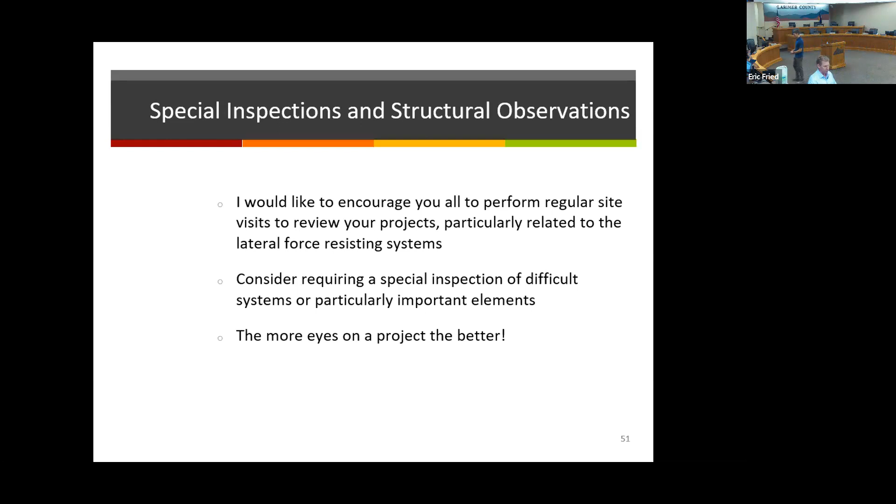Can you explain what a return interval is? That would be another 2-hour presentation. It's statistics. It's a mean interval based on the recurrence. So a 50-year is a 50-year interval. The chance of it happening is every 50 years, but that doesn't mean it will happen only once every 50 years. You could have two 50-year events in two consecutive weeks even. So it's just how likely the event is to happen.

Those mean intervals we were talking about: if it's an occupancy 2, so a house, it's a 700-year event. If it's an occupancy 3, so a school, then it's a 1700-year, and an occupancy 4 is also 1700 years. So the more important the structure is, the stricter the criteria we have to design to.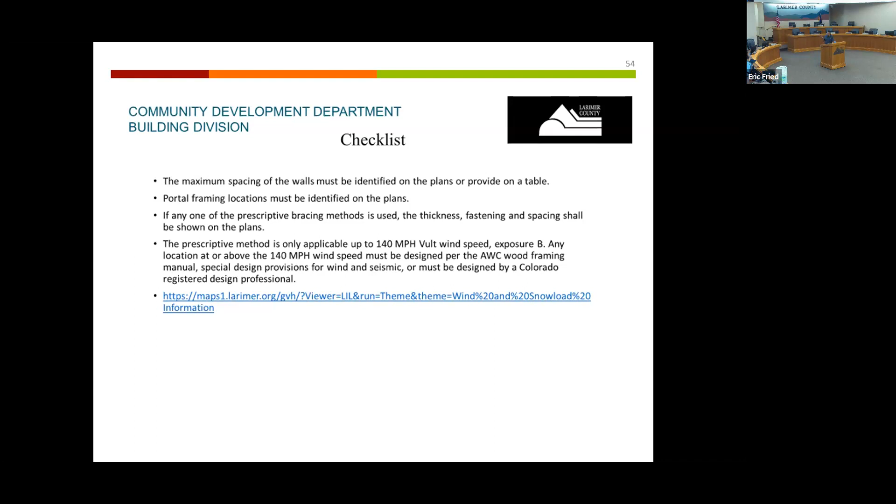And right there is our map, and I have it on the next page. Here's our wind speed map. We have that on our website. And if you have any questions on it, let me know. I know a lot of you guys use that.

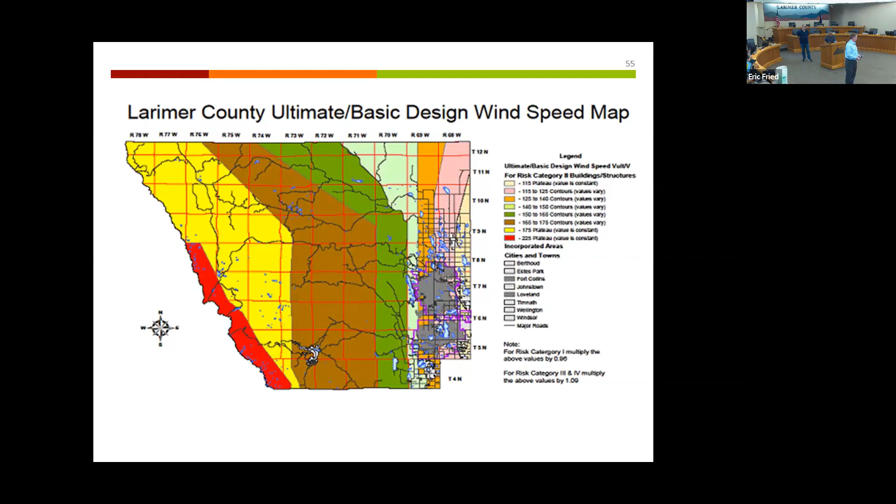It's super easy. And the truss companies are pretty good. They'll start with a PG of, let's say 100 pounds, and then they say they'll interpolate. It'll even say interpolating and whatever it is, 79, whatever they did. So most of the time they're pretty good at that. So I mean, I don't have too many problems with it.

Just to clarify one thing, we allow interpolation if there's a design professional involved. So, as long as one of you guys is looking over it. If it's a homeowner doing the prescriptive, then we don't let them interpolate. Good job.

Are there any other questions for the building officials? I'll turn it over to Mark. All right. And after Mark's done, I know there's other building officials here for other jurisdictions, feel free to chime in if you guys look for something else or have a different point of view on it.

And one more thing, I did bring our handout for brace wall design there. So if you guys want to take a look at it, I brought about 26 of them. So feel free to take a look at them. Sometimes, like I said, I hand them to homeowners. They have no clue what I'm talking about. But yeah, feel free to take a look at them.

All right. Thank you. Hey, good morning, everyone. So I see a lot of familiar faces. I probably know most of you from the documents you submit.

Shear wall inspections, we don't get involved in a lot of multi-story in the county. It's almost all custom homes. And with those custom homes, there's a lot of shear wall requirements. We were talking about what we mostly see. We see the segmented design probably the most, up to 40 hold downs in the foundation. That's something where we're actually notating on the plan, highlighting, because there are so many hold downs on interior shear wall as well as exterior. I'd say 90% of the designs are using the segmented design.

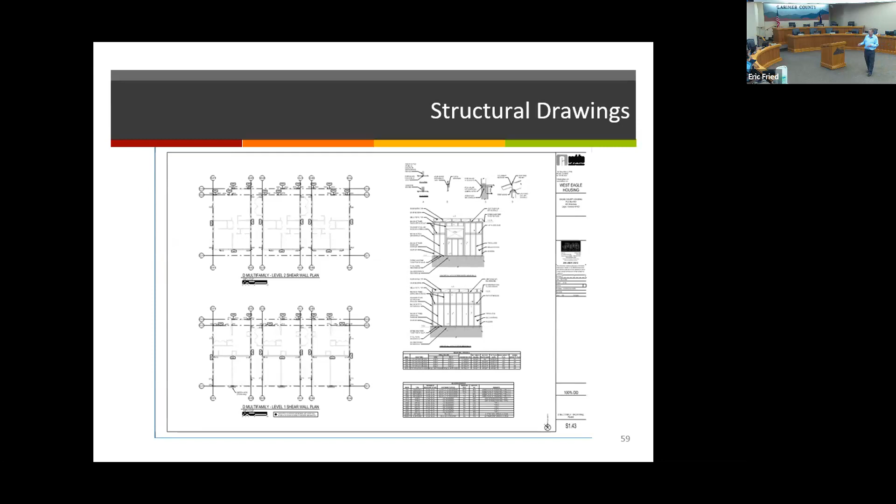For smaller, simple houses, you can definitely indicate the shear walls on the framing plans. This example right here is an actual shear wall plan. On the shear wall plans, we have our hold down schedule, our shear wall schedule, and some diagrams of how we want them to put it together. So this is just a blow up of that plan.

So you can see we indicate, and you can't really read it, but SW6 means that we have 6-inch nailing and SW4 is 4-inch. So that's kind of a nomenclature that we've moved to. Makes it easy for us when we're in the field that we don't have to go and say, oh, which shear wall is this? And then typically the point of the shear wall symbol points to the side that we want the sheathing on, if it matters to you. All we care is that it's on one side, if it's a one-sided wall, right?

But something to think about too is if it's an interior wall that you're putting it on and you've got perpendicular partitions coming into it, they're going to want to interrupt that plywood. So you better have a detail that shows them how to do that.

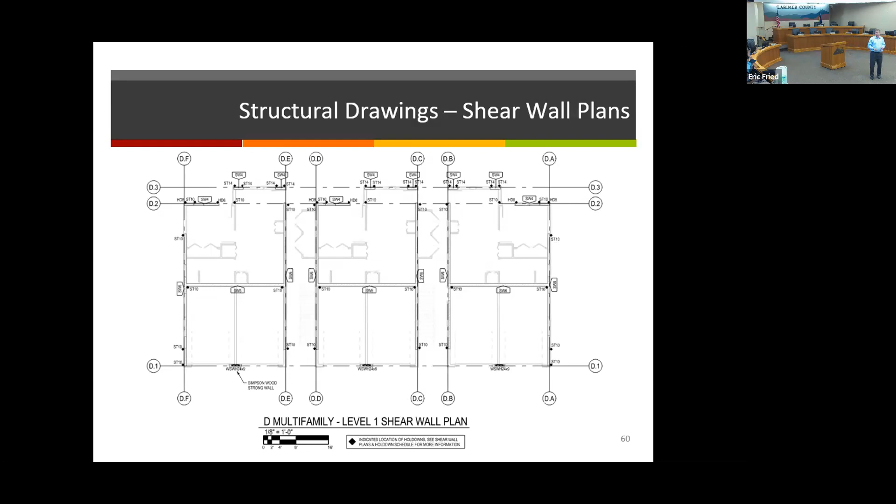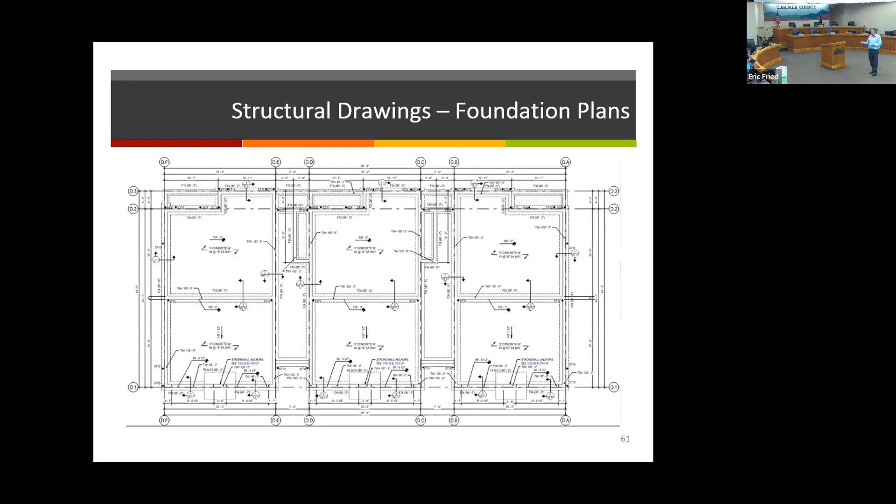Foundation plan. I said I was going to focus on the lateral system, but we indicate the hold downs on the shear wall plan and the foundation plan. I don't know how many of you have gone out into the field to look at a foundation and the concrete guy has one page, right? He doesn't have the full structural set of drawings. So we used to just indicate with a little diamond and a note that said, look at this sheet. Well, after I had to go into the field and flip back and forth between 3 sheets, I was like, this is a bad idea. So put as much information on each plan as you can and make it as simple to read as possible, I would say.

The lower portion of this slide is our shear wall schedule. So we have the mark, we have the spacing, and then the nailing. We're going to be changing this with the new NDS to actually just say diameter and length of nail rather than 8D.

This again is another picture of our shear wall. What I want to point out for this is very important, what I've highlighted. So typical for our shear wall nailing, one of the things that I see a lot is that the nails are overdriven, right? And once they're overdriven, and I'll get into it, there's criteria of how much capacity you have left in your wall, if any.

So what I tend to do is have a pre-construction meeting with the GC before they start putting on the exterior sheathing. And this is for a bigger project, not necessarily a house. It can be just a phone call if it's a house, right? And just lay out the expectations and say, you know, we've seen overdriven nails a lot and it's a big deal for us. So make sure that your framer has their nail gun set appropriately.

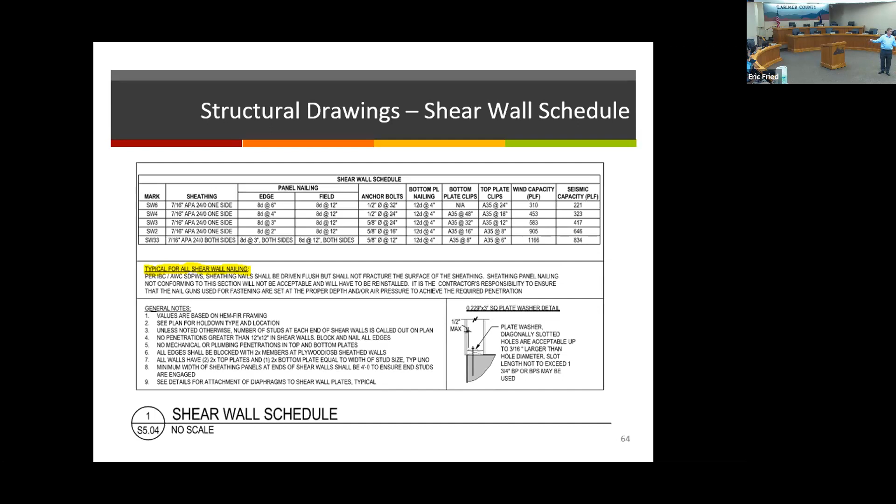And it's always better for them to be sticking out a little bit. And I know they don't like to do it, but then they can take their hammer and drive it flush. Now, as a former framer, I would never want to have to do that. So I would make sure that my gun was set right.

Just some other typical things that you want to look at is that in this photo here, you can see this was a multifamily project where that's a party wall. So they've got the sheathing on one side, they're gonna have to come back and do the sheathing on the other side later, but I make sure that they have all their blocking in for the panel edge nailing for when the second set does have to go in. So that's a multi-step process, right? Where you have to go back and forth to the field many times.

What I try to do is we do fixed fee through CD. And then for projects such as this, we like to do CA hourly. This particular job, my CA fee exceeded our entire design fee because the contractor kept calling us out. If that's not an option, because I know some people are going to say, I'm not just going to give you an open checkbook, right?

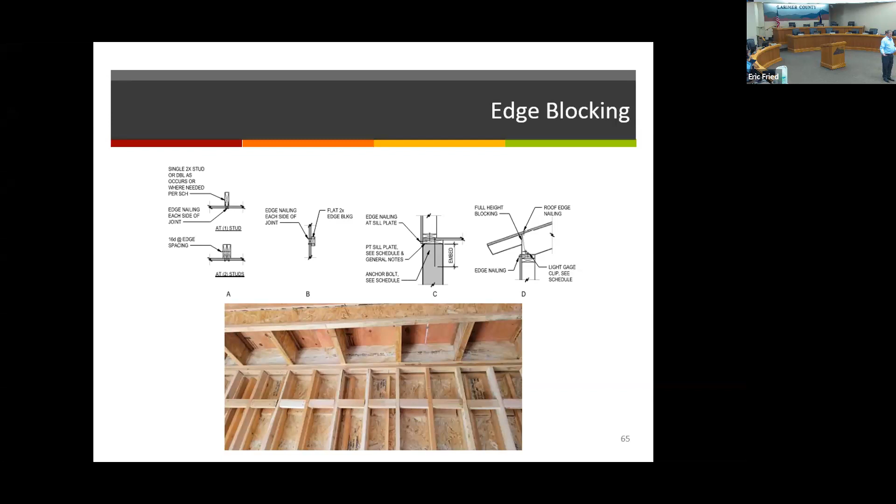Make sure that your scope is clearly defined in CA, where you specify the number of site visits that you have included in your fixed fee. So if you have to go out more times, then you can ask for more money for that. So you're just protecting yourself so that you don't have to just, you know, lose tons of money.

There's different types of sheathing that you can use, right? Plywood, OSB, they're the same. Zip, there's two different things for zip, right? There's Zip and there's Zip R. When I say Zip, I like the Zip structural sheathing. When we're talking to an architect, they want the insulated one. There's a big difference between the two.

Regular Zip is essentially the same as your structural sheathing. There's no reduction. So if they say, can we use this instead of this? The answer is yes. If they say, can we use Zip R instead of your 3-inch nailing that you've got on your OSB? The answer is absolutely no.

But what I have seen and what we did on one project is 155-mile-an-hour wind. They wanted Zip R. So they ended up doing both. They did OSB on the entire outside of the building. We did the observation. Then they came over and did Zip R on top of it. I don't know how cost effective that is, but it was what the architect wanted in order to get their continuous insulation and their vapor barrier. So keep that in your back pocket as an option.

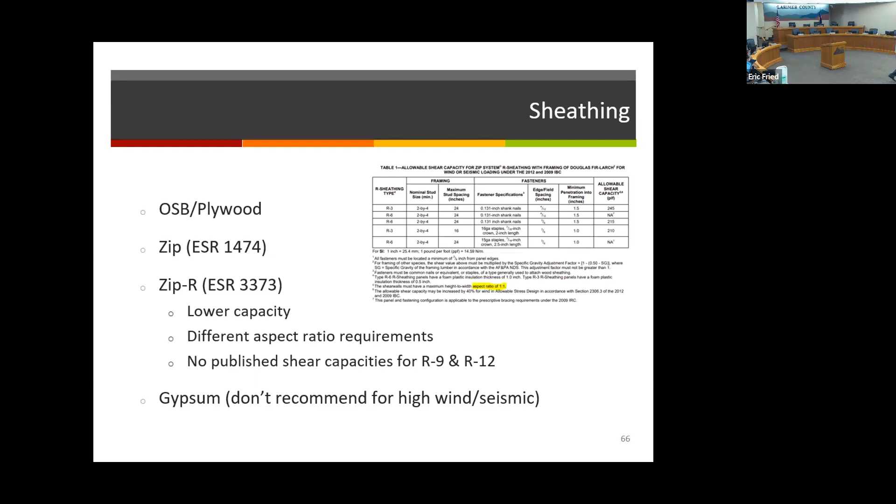The aspect ratio of Zip R puts you more in as if you were designing for seismic, right? So you don't have that 3.5:1 aspect ratio that you do. You've got either a 2:1 or a 1:1. So if you've got a 9-foot tall plate, you're going to have a 9-foot piece of wall in order to even count on that as a shear wall if you're using Zip R. Now it might be 4.5. I think this is a typo, but maybe it's not. So do your own research and dig into that.

Check the depth of the nail heads. I had a project that was in Yellowstone. So 100-pound ground snow load, seismic design category D. It was a big deal. And these were modular buildings. So they were building them in Boise, I believe, shipping the boxes to site and stacking them. Well, when the first set of boxes got to the site, we were seeing that 90% of the nails were overdriven. They had to replace a whole bunch of sheathing.

So what I do is, do I bring a pair of calipers out there? No. My rule of thumb is that when I put my finger on the hole, if my finger can touch the nail head, it's okay. If it can't, then I start looking at it a little more closely.

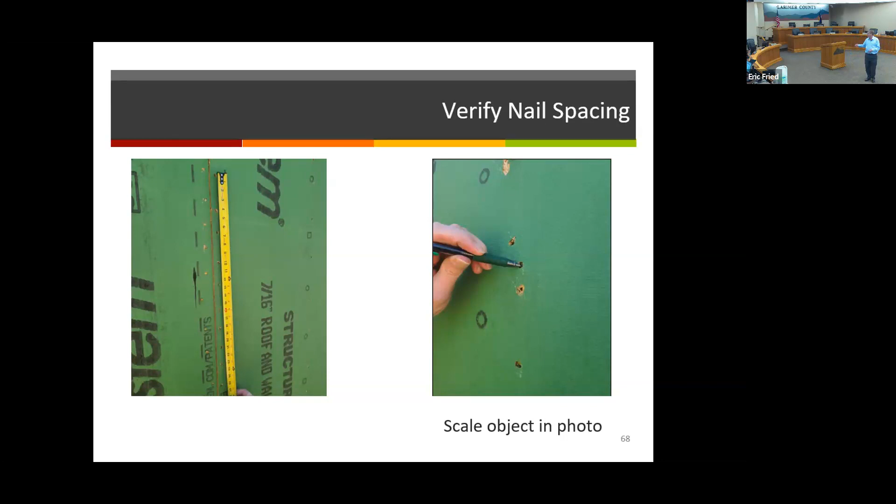So this is a great document for all the engineers in the room. I'd recommend that you grab it, read it. It helped me out a lot on that Yellowstone project. Okay.

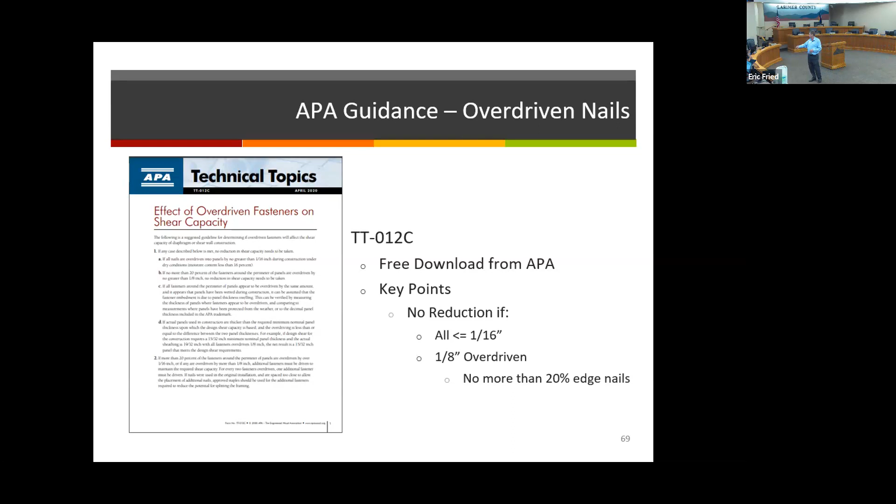And if you look at it, it's a prescriptive method, right? So you have to meet X, Y, and Z in order to use that criteria. You can't say, oh, I'm close with this, so that's good enough. It's a prescriptive method. If you were to run the numbers on it, you would be hard pressed to try to make it work. So either you're doing the IRC and meeting all of the requirements of the IRC, or you as the engineer of record are designing the lateral system and taking responsibility for everything.

When I go in the field, I always check all the hold downs. So I take my plan with me and I check every one. I circle ones that are not there or not installed properly.

One of the things that I would recommend, if you are going in the field and you've got like an HDU2 or an HDU5, you've got the nut on it, 5/8 inch diameter for those, check the nut, make sure it's tight. If it's not, then I check every single one of them. And 90% of the time, they're not tight. So just something to be aware of. And inspectors, please check that too.

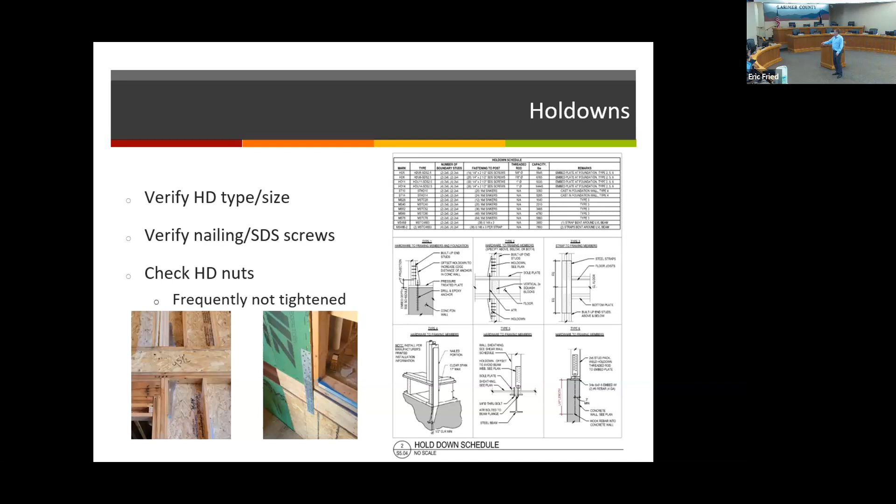Okay, so like I said, just a big high level overview. Things to look for. Make sure your drawings clearly define what your lateral system is and what's important and that they can build it. So that's just kind of a high level of what I see when I'm in the field.